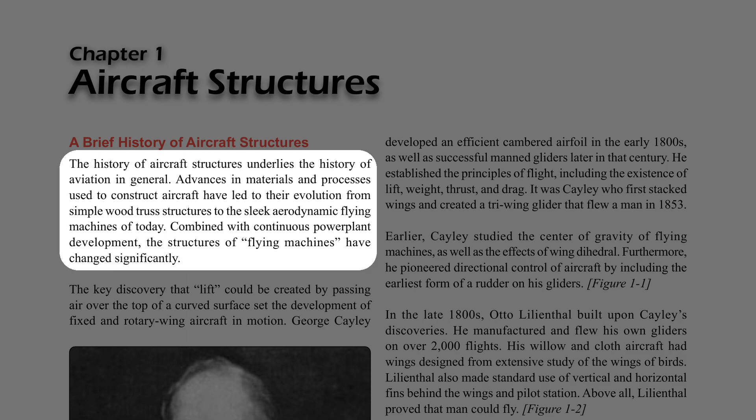The key discovery that lift could be created by passing air over the top of a curved surface set the development of fixed and rotary wing aircraft in motion.

George Cayley developed an efficient cambered airfoil in the early 1800s, as well as successful manned gliders later in that century. He established the principles of flight, including the existence of lift, weight, thrust, and drag. It was Cayley who first stacked wings and created a tri-wing glider that flew a man in 1853.

Earlier, Cayley studied the center of gravity of flying machines, as well as the effects of wing dihedral.

Furthermore, he pioneered directional control of aircraft by including the earliest form of a rudder on his gliders.

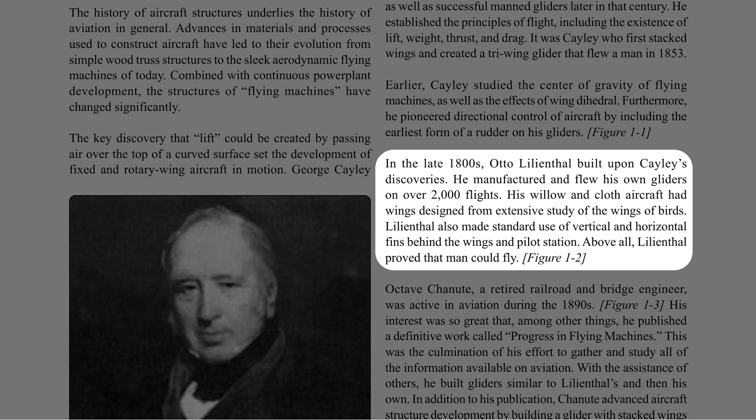In the late 1800s, Otto Lilienthal built upon Cayley's discoveries. He manufactured and flew his own gliders on over 2,000 flights. His willow and cloth aircraft had wings designed from extensive study of the wings of birds. Lilienthal also made standard use of vertical and horizontal fins behind the wings and pilot station. Above all, Lilienthal proved that man could fly.

Octave Chanute, a retired railroad and bridge engineer, was active in aviation during the 1890s. His interest was so great that, among other things, he published a definitive work called Progress in Flying Machines. This was the culmination of his effort to gather and study all of the information available on aviation.

With the assistance of others, he built gliders similar to Lilienthal's and then his own. In addition to his publication, Chanute advanced aircraft structure development by building a glider with stacked wings incorporating the use of wires as wing supports.

The work of all of these men was known to the Wright brothers when they built their successful powered airplane in 1903. The first of its kind to carry a man aloft, the Wright Flyer had thin cloth-covered wings attached to what was primarily truss structures made of wood. The wings contained forward and rear spars and were supported with both struts and wires. Stacked wings, two sets, were also part of the Wright Flyer.

Powered heavier-than-air aviation grew from the Wright design. Inventors and fledgling aviators began building their own aircraft. Early on, many were similar to that constructed by the Wrights, using wood and fabric with wires and struts to support the wing structure.

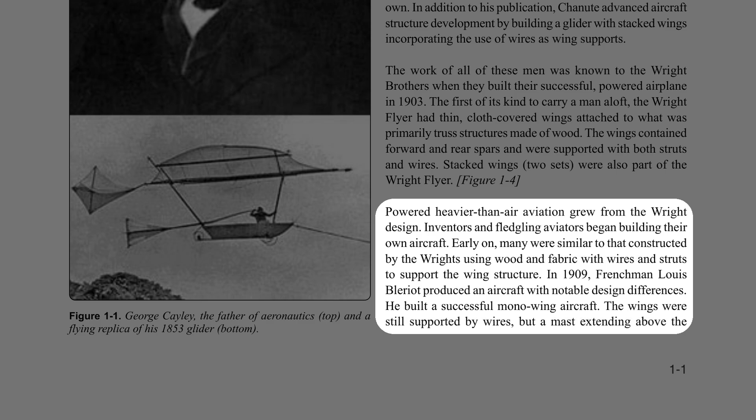In 1909, Frenchman Louis Blériot produced an aircraft with notable design differences. He built a successful monowing aircraft. The wings were still supported by wires, but a mast extending above the fuselage enabled the wings to be supported from above as well as underneath. This made possible the extended wing length needed to lift an aircraft with a single set of wings. Blériot used a Pratt truss-type fuselage frame.

More powerful engines were developed, and airframe structures changed to take advantage of the benefits. As early as 1910, German Hugo Junkers was able to build an aircraft with metal truss construction and metal skin due to the availability of stronger power plants to thrust the plane forward and into the sky. The use of metal instead of wood for the primary structure eliminated the need for external wing braces and wires. His J-1 also had a single set of wings, a monoplane instead of a stacked set.

Leading up to World War I, stronger engines also allowed designers to develop thicker wings with stronger spars. Wire wing bracing was no longer needed. Flatter, lower wing surfaces on high camber wings created more lift.

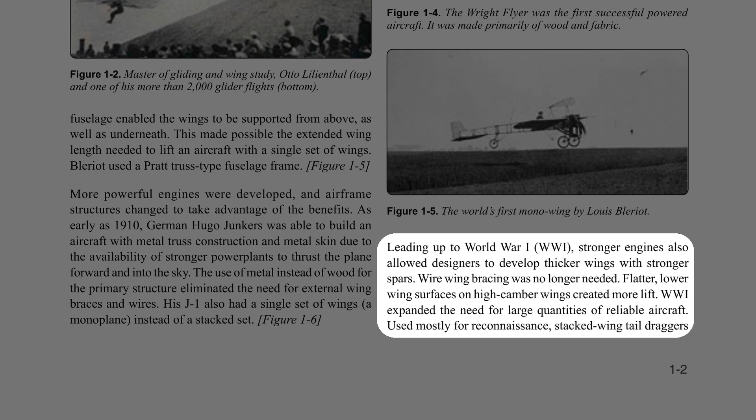WWI expanded the need for large quantities of reliable aircraft. Used mostly for reconnaissance, stacked wing-tail draggers with wood and metal truss frames with mostly fabric skin dominated the wartime sky. The Red Baron's Fokker DR-1 was typical.

In the 1920s, the use of metal in aircraft construction increased. Fuselages able to carry cargo and passengers were developed. The early flying boats with their hull-type construction from the shipbuilding industry provided the blueprints for semi-monocoque construction of fuselages. Truss-type designs faded. A tendency toward cleaner mono-wing designs prevailed.

Into the 1930s, all-metal aircraft accompanied new, lighter, and more powerful engines. Larger semi-monocoque fuselages were complemented with stress skin wing designs. Fewer truss and fabric aircraft were built.

World War II brought about a myriad of aircraft designs using all-metal technology. Deep fuel-carrying wings were the norm, but the desire for higher flight speeds prompted the development of thin-winged aircraft in which fuel was carried in the fuselage. The first composite structure aircraft, the de Havilland Mosquito, used a balsa wood sandwich material in the construction of the fuselage. The fiberglass radome was also developed during this period.

After WWII, the development of turbine engines led to higher altitude flight. The need for pressurized aircraft pervaded aviation. Semi-monocoque construction needed to be made even stronger as a result.

Refinements to the all-metal semi-monocoque fuselage structure were made to increase strength and combat metal fatigue caused by the pressurization-depressurization cycle. Rounded window and door openings were developed to avoid weak areas where cracks could form.

The use of honeycomb-constructed panels in Boeing's airline series saved weight while not compromising strength. Initially, aluminum core, with aluminum or fiberglass skin sandwich panels, were used on wing panels, flight control surfaces, cabin floorboards, and other applications. A steady increase in the use of honeycomb and foam core sandwich components, and a wide variety of composite materials, characterizes the state of aviation structures from the 1970s to the present.

Advanced techniques and material combinations have resulted in a gradual shift from aluminum to carbon fiber and other strong, lightweight materials. These new materials are engineered to meet specific performance requirements for various components on the aircraft. Many airframe structures are made of more than 50% advanced composites, with some airframes approaching 100%.

The term Very Light Jet, or VLJ, has come to describe a new generation of jet aircraft made almost entirely of advanced composite materials. It is possible that non-composite aluminum aircraft structures will become obsolete, as did the methods and materials of construction used by Cayley, Lilienthal, and the Wright brothers.

Generally, an aircraft is a device that is used for, or is intended to be used for, flight in the air. Major categories of aircraft are airplane, rotorcraft, glider, and lighter-than-air vehicles. Each of these may be divided further by major distinguishing features of the aircraft, such as airships and balloons. Both are lighter-than-air aircraft, but have differentiating features and are operated differently.

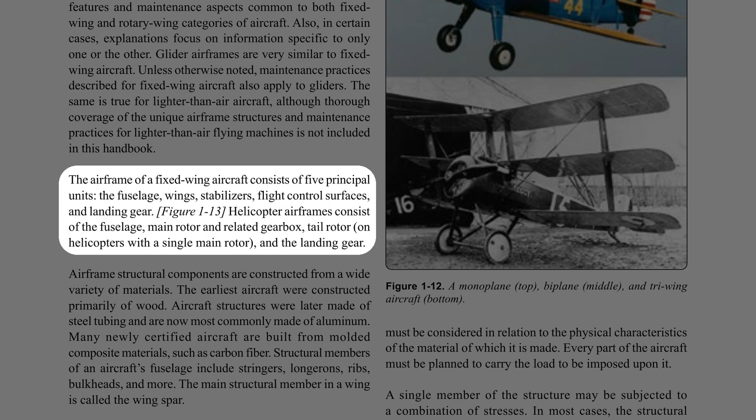Airframe structural components are constructed from a wide variety of materials. The earliest aircraft were constructed primarily of wood. Aircraft structures were later made of steel tubing and are now most commonly made of aluminum. Many newly certified aircraft are built from molded composite materials, such as carbon fiber.

Structural members of an aircraft's fuselage include stringers, longerons, ribs, bulkheads, and more. The main structural member in a wing is called the wing spar. The skin of aircraft can also be made from a variety of materials, ranging from impregnated fabric to plywood, aluminum, or composites. Under the skin and attached to the structural fuselage are the many components that support airframe function.

The entire airframe and its components are joined by rivets, bolts, screws, and other fasteners. Welding, adhesives, and special bonding techniques are also used.

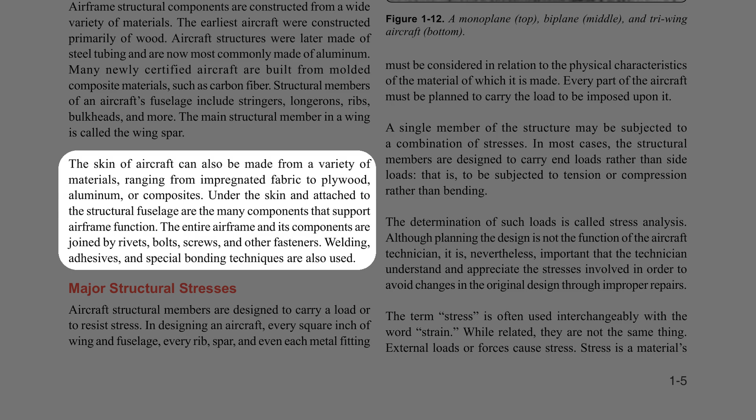Major structural stresses: aircraft structural members are designed to carry a load or to resist stress. In designing an aircraft, every square inch of wing and fuselage, every rib, spar, and even each metal fitting must be considered in relation to the physical characteristics of the material of which it is made. Every part of the aircraft must be planned to carry the load to be imposed upon it.

A single member of the structure may be subjected to a combination of stresses. In most cases, the structural members are designed to carry end loads rather than side loads, that is, to be subjected to tension or compression rather than bending. The determination of such loads is called stress analysis.

Although planning the design is not the function of the aircraft technician, it is nevertheless important that the technician understand and appreciate the stresses involved in order to avoid changes in the original design through improper repairs.

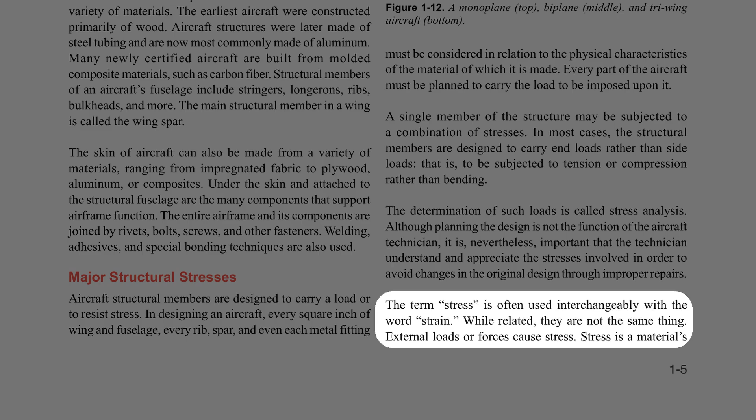The term stress is often used interchangeably with the word strain. While related, they are not the same thing. External loads or forces cause stress. Stress is a material's internal resistance, or counterforce, that opposes deformation. The degree of deformation of a material is strain.

When a material is subjected to a load or force, that material is deformed, regardless of how strong the material is or how light the load is. There are 5 major stresses to which all aircraft are subjected: tension, compression, torsion, shear, and bending.

Tension is the stress that resists the force that tends to pull something apart. The engine pulls the aircraft forward, but air resistance tries to hold it back. The result is tension, which stretches the aircraft. The tensile strength of a material is measured in pounds per square inch (psi), and is calculated by dividing the load in pounds required to pull the material apart by its cross-sectional area in square inches.

Compression is the stress that resists a crushing force. The compressive strength of a material is also measured in psi.

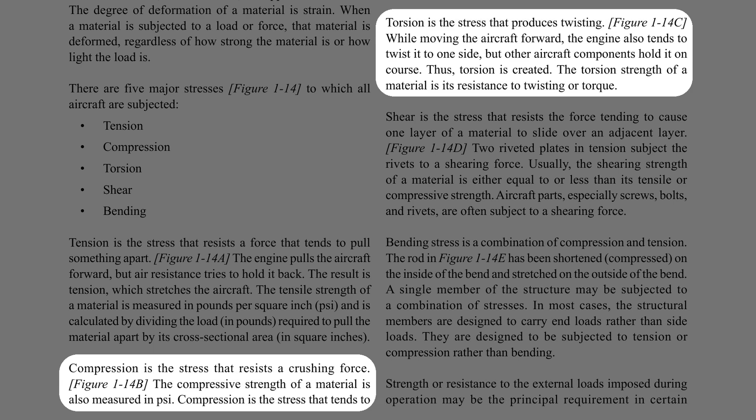Torsion is the stress that produces twisting. While moving the aircraft forward, the engine also tends to twist it to one side, but other aircraft components hold it on course. Thus, torsion is created. The torsion strength of a material is its resistance to twisting or torque.

Shear is the stress that resists the force tending to cause one layer of a material to slide over an adjacent layer. Two riveted plates in tension subject the rivets to a shearing force. Usually, the shearing strength of a material is either equal to or less than its tensile or compressive strength. Aircraft parts, especially screws, bolts, and rivets, are often subject to a shearing force.

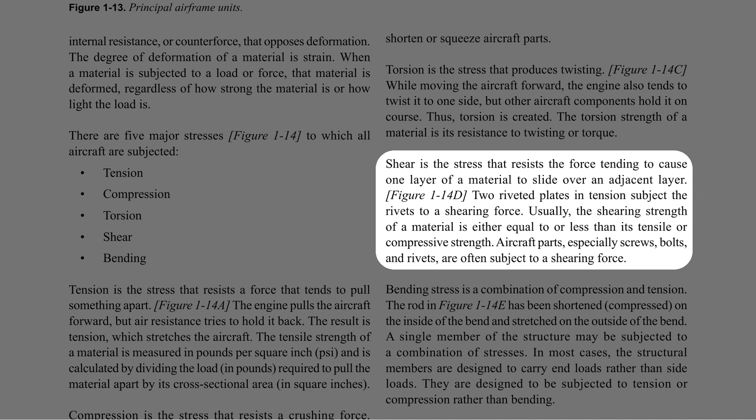Bending stress is a combination of compression and tension. The rod in Figure 1-14E has been shortened and compressed on the inside of the bend and stretched on the outside of the bend.

A single member of the structure may be subjected to a combination of stresses. In most cases, the structural members are designed to carry end loads rather than side loads. They are designed to be subjected to tension or compression rather than bending.

The strength or resistance to the external loads imposed during operation may be the principal requirement in certain structures. However, there are numerous other characteristics in addition to designing to control the 5 major stresses that engineers must consider. For example, cowling, fairings, and similar parts may not be subject to significant loads requiring a high degree of strength. However, these parts must have streamlined shapes to meet aerodynamic requirements such as reducing drag or directing airflow.

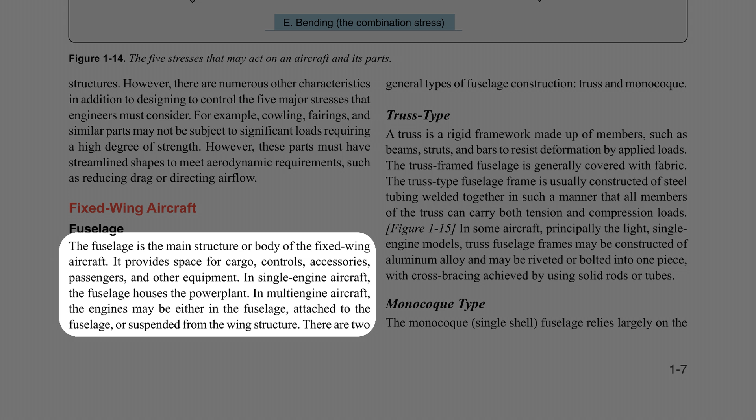Fixed-wing aircraft fuselage: the fuselage is the main structure or body of the fixed-wing aircraft. It provides space for cargo, controls, accessories, passengers, and other equipment. In single-engine aircraft, the fuselage houses the power plant. In multi-engine aircraft, the engines may be either in the fuselage, attached to the fuselage, or suspended from the wing structure. There are 2 general types of fuselage construction: truss and monocoque.

Truss type: a truss is a rigid framework made up of members, such as beams, struts, and bars, to resist deformation by applied loads. The truss frame fuselage is generally covered with fabric. The truss type fuselage frame is usually constructed of steel tubing welded together in such a manner that all members of the truss can carry both tension and compression loads.

In some aircraft, principally the light single-engine models, truss fuselage frames may be constructed of aluminum alloy and may be riveted or bolted into one piece, with cross bracing achieved by using solid rods or tubes. Monocoque type.

The monocoque single-shell fuselage relies largely on the strength of the skin or covering to carry the primary loads. The design may be divided into 3 classes: monocoque, semi-monocoque, and reinforced shell. Different portions of the same fuselage may belong to either of the 3 classes, but most modern aircraft are considered to be of semi-monocoque type construction.

The true monocoque construction uses formers, frame assemblies, and bulkheads to give shape to the fuselage. The heaviest of these structural members are located at intervals to carry concentrated loads and at points where fittings are used to attach other units such as wings, power plants, and stabilizers. Since no other bracing members are present, the skin must carry the primary stresses and keep the fuselage rigid. Thus, the biggest problem involved in monocoque construction is maintaining enough strength while keeping the weight within allowable limits.

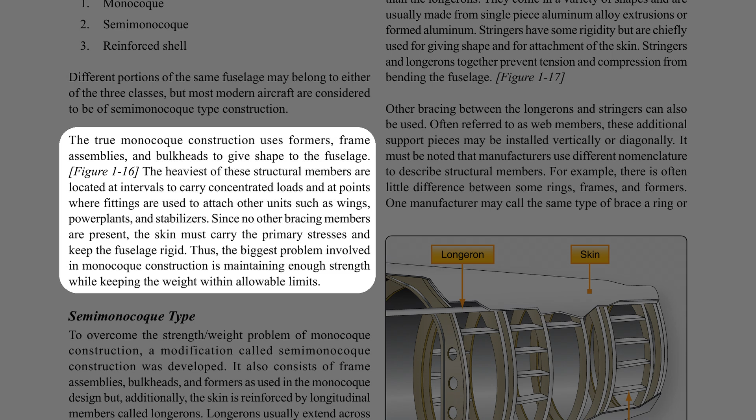Semi-monocoque type: to overcome the strength-weight problem of monocoque construction, a modification called semi-monocoque construction was developed. It also consists of frame assemblies, bulkheads, and formers as used in the monocoque design, but additionally, the skin is reinforced by longitudinal members called longerons. Longerons usually extend across several frame members and help the skin support primary bending loads. They are typically made of aluminum alloy, either of a single piece or a built-up construction.

The longerons are supplemented by other longitudinal members called stringers. Stringers are typically more numerous and lighter in weight than the longerons. They come in a variety of shapes and are usually made from single-piece aluminum alloy extrusions or formed aluminum. Stringers have some rigidity but are chiefly used for giving shape and for attachment of the skin. Stringers and longerons together prevent tension and compression from bending the fuselage.

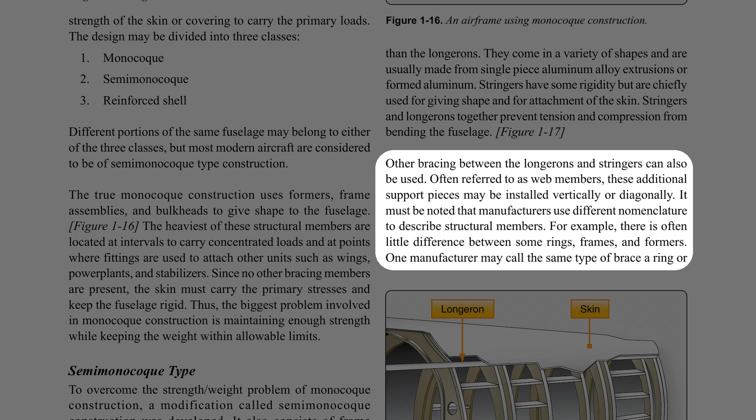Other bracing between the longerons and stringers can also be used. Often referred to as web members, these additional support pieces may be installed vertically or diagonally. It must be noted that manufacturers use different nomenclature to describe structural members. For example, there is often little difference between some rings, frames, and formers. One manufacturer may call the same type of brace a ring or a frame. Manufacturing instructions and specifications for a specific aircraft are the best guides.

The semi-monocoque fuselage is constructed primarily of alloys of aluminum and magnesium, although steel and titanium are sometimes found in areas of high temperatures. Individually, not one of the aforementioned components is strong enough to carry the loads imposed during flight and landing, but when combined, those components form a strong, rigid framework. This is accomplished with gussets, rivets, nuts and bolts, screws, and even friction stir welding. A gusset is a type of connection bracket that adds strength.

To summarize, in semi-monocoque fuselages, the strong, heavy longerons hold the bulkheads and formers, and these, in turn, hold the stringers, braces, web members, etc. All are designed to be attached together into the skin to achieve the full strength benefits of semi-monocoque design. It is important to recognize that the metal skin or covering carries part of the load. The fuselage skin thickness can vary with the load carried and the stresses sustained at a particular location.

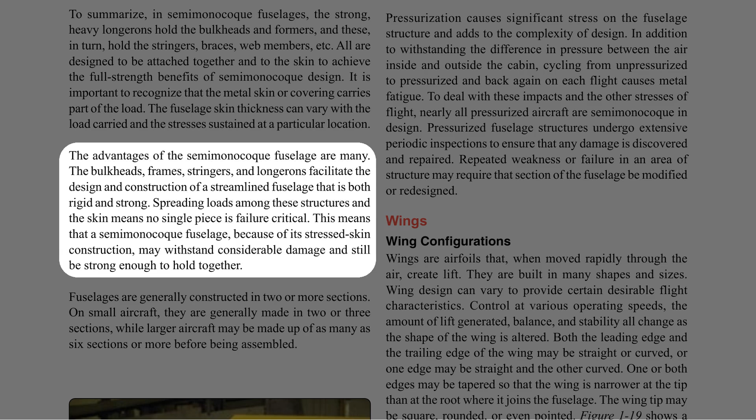The advantages of the semi-monocoque fuselage are many. The bulkheads, frames, stringers, and longerons facilitate the design and construction of a streamlined fuselage that is both rigid and strong. Spreading loads among these structures and the skin means no single piece is failure critical. This means that a semi-monocoque fuselage, because of its stressed skin construction, may withstand considerable damage and still be strong enough to hold together.

Fuselages are generally constructed in 2 or more sections. On small aircraft, they are generally made in 2 or 3 sections, while larger aircraft may be made up of as many as 6 sections or more before being assembled. Reinforced shell type: the reinforced shell has the skin reinforced by a complete framework of structural members.

Pressurization: many aircraft are pressurized. This means that air is pumped into the cabin after takeoff, and a difference in pressure between the air inside the cabin and the air outside the cabin is established. This differential is regulated and maintained. In this manner, enough oxygen is made available for passengers to breathe normally and move around the cabin without special equipment at high altitudes. Pressurization causes significant stress on the fuselage structure and adds to the complexity of design.

In addition to withstanding the difference in pressure between the air inside and outside the cabin, cycling from unpressurized to pressurized and back again on each flight causes metal fatigue. To deal with these impacts and the other stresses of flight, nearly all pressurized aircraft are semi-monocoque in design. Pressurized fuselage structures undergo extensive periodic inspections to ensure that any damage is discovered and repaired. Repeated weakness or failure in an area of structure may require that section of the fuselage be modified or redesigned.

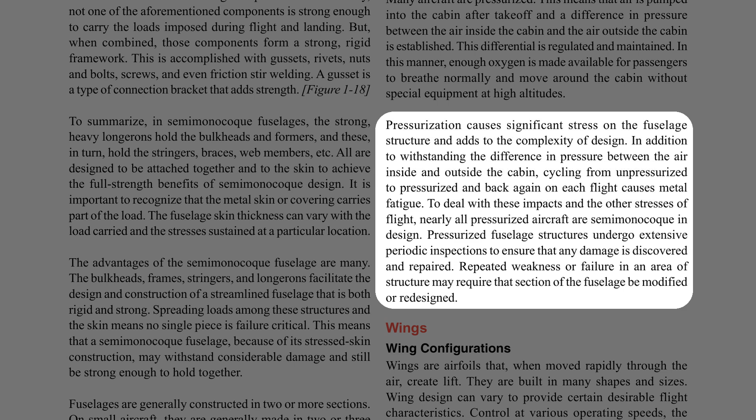Wings, wing configurations.

Wings are airfoils that, when moved rapidly through the air, create lift. They are built in many shapes and sizes. Wing design can vary to provide certain desirable flight characteristics. Control at various operating speeds, the amount of lift generated, balance, and stability all change as the shape of the wing is altered. Both the leading edge and the trailing edge of the wing may be straight or curved, or one edge may be straight and the other curved.

One or both edges may be tapered so that the wing is narrower at the tip than at the root where it joins the fuselage. The wing tip may be square, rounded, or even pointed. Figure 1-19 shows a number of typical wing leading and trailing edge shapes.

The wings of an aircraft can be attached to the fuselage at the top, mid-fuselage, or at the bottom. They may extend perpendicular to the horizontal plane of the fuselage, or can angle up or down slightly. This angle is known as the wing dihedral. The dihedral angle affects the lateral stability of the aircraft. Figure 1-20 shows some common wing attach points and dihedral angle.

Wing structure. The wings of an aircraft are designed to lift it into the air. Their particular design for any given aircraft depends on a number of factors, such as size, weight, use of the aircraft, desired speed in flight and at landing, and desired rate of climb. The wings of aircraft are designated left and right, corresponding to the left and right sides of the operator when seated in the flight deck.

Often wings are of full cantilever design. This means they are built so that no external bracing is needed. They are supported internally by structural members assisted by the skin of the aircraft. Other aircraft wings use external struts or wires to assist in supporting the wing and carrying the aerodynamic and landing loads. Wing support cables and struts are generally made from steel.

Many struts and their attached fittings have fairings to reduce drag. Short, nearly vertical supports called jury struts are found on struts that attach to the wings a great distance from the fuselage. This serves to subdue strut movement and oscillation caused by the air flowing around the strut in flight. Figure 1-22 shows samples of wings using external bracing, also known as semi-cantilever wings. Cantilever wings built with no external bracing are also shown.

Aluminum is the most common material from which to construct wings, but they can be wood covered with fabric and occasionally a magnesium alloy has been used. Moreover, modern aircraft are tending toward lighter and stronger materials throughout the airframe and in wing construction. Wings made entirely of carbon fiber or other composite materials exist, as well as wings made of a combination of materials for maximum strength to weight performance.

The internal structures of most wings are made up of spars and stringers running spanwise, and ribs and formers or bulkheads running chordwise, leading edge to trailing edge. The spars are the principal structural members of a wing. They support all distributed loads as well as concentrated weights such as the fuselage, landing gear, and engines. The skin, which is attached to the wing structure, carries part of the loads imposed during flight. It also transfers the stresses to the wing ribs. The ribs, in turn, transfer the loads to the wing spars.

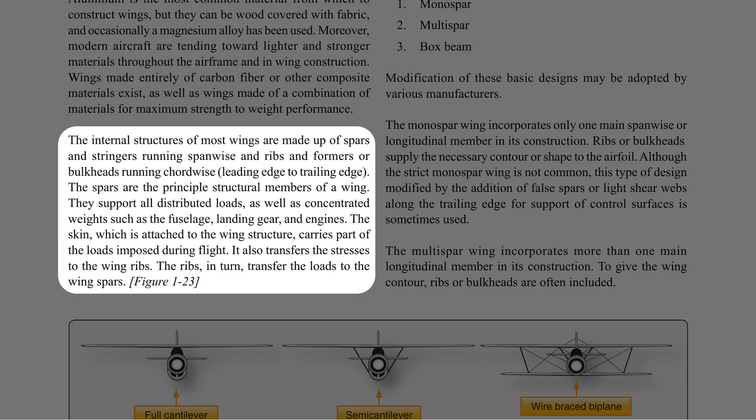In general, wing construction is based on one of three fundamental designs: monospar, multispar, and box beam. Modification of these basic designs may be adopted by various manufacturers. The monospar wing incorporates only one main spanwise or longitudinal member in its construction. Ribs or bulkheads supply the necessary contour or shape to the airfoil. Although the strict monospar wing is not common, this type of design modified by the addition of false spars or light shear webs along the trailing edge for support of control surfaces is sometimes used. The multispar wing incorporates more than one main longitudinal member in its construction.

To give the wing contour, ribs or bulkheads are often included. The box beam type of wing construction uses two main longitudinal members with connecting bulkheads to furnish additional strength and to give contour to the wing. A corrugated sheet may be placed between the bulkheads and the smooth outer skin so that the wing can better carry tension and compression loads.

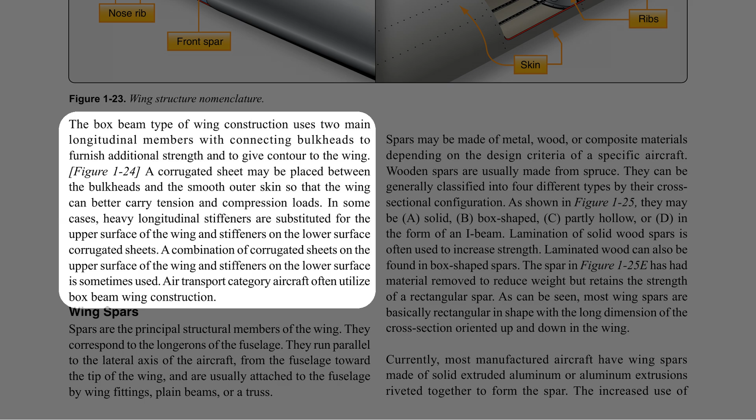Wing spars are the principal structural members of the wing. They correspond to the longerons of the fuselage, running parallel to the lateral axis from the fuselage toward the wingtip, usually attached to the fuselage by wing fittings, plain beams, or a truss. Spars may be made of metal, wood, or composite materials depending on the design criteria of a specific aircraft.

Wooden spars are usually made from spruce. They can be generally classified into four different types by cross-sectional configuration: solid, box-shaped, partly hollow, or in the form of an I-beam. Lamination of solid wood spars is often used to increase strength, and laminated wood can also be found in box-shaped spars. One spar type has had material removed to reduce weight but retains the strength of a rectangular spar.

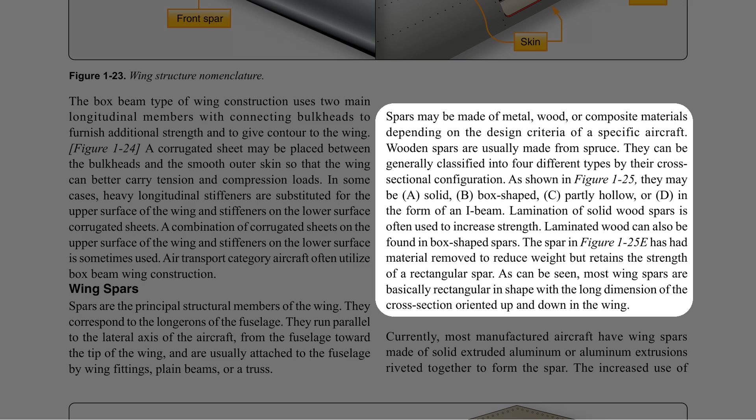As can be seen, most wing spars are basically rectangular in shape with the long dimension of the cross-section oriented up and down in the wing. Currently, most manufactured aircraft have wing spars made of solid extruded aluminum or aluminum extrusions riveted together to form the spar.

The increased use of composites and the combining of materials should make airmen vigilant for wing spars made from a variety of materials. Most manufactured aircraft have wing spars made of solid extruded aluminum or aluminum extrusions riveted together to form the spar.

Figure 1-26 shows examples of metal wing spar cross-sections. In an I-beam spar, the top and bottom are called the caps, and the vertical section is called the web. The entire spar can be extruded from one piece of metal, but often it's built up from multiple extrusions or formed angles. The web forms the principal depth portion of the spar, and the cap strips, extrusions, formed angles, or milled sections are attached to it. Together, these members carry the loads caused by wing bending, with the caps providing a foundation for attaching the skin.

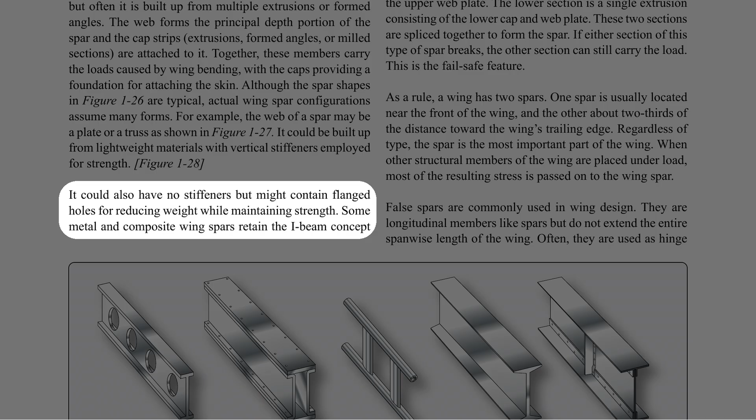Although the spar shapes shown are typical, actual wing spar configurations assume many forms. For example, the web of a spar may be a plate or a truss. It could be built up from lightweight materials with vertical stiffeners employed for strength, or it could have no stiffeners but contain flanged holes for reducing weight while maintaining strength. Some metal and composite wing spars retain the I-beam concept but use a sine wave web.

Additionally, fail-safe spar web design exists. Fail-safe means that should one member of a complex structure fail, some other part of the structure assumes the load of the failed member and permits continued operation. A spar with fail-safe construction is made in two sections. The top section consists of a cap riveted to the upper web plate.

The lower section is a single extrusion consisting of the lower cap and web plate. These two sections are spliced together to form the spar. If either section of this type of spar breaks, the other section can still carry the load. This is the fail-safe feature.

As a rule, a wing has two spars. One spar is usually located near the front of the wing, and the other about two-thirds of the distance toward the wing's trailing edge. Regardless of type, the spar is the most important part of the wing. When other structural members of the wing are placed under load, most of the resulting stress is passed on to the wing spar.

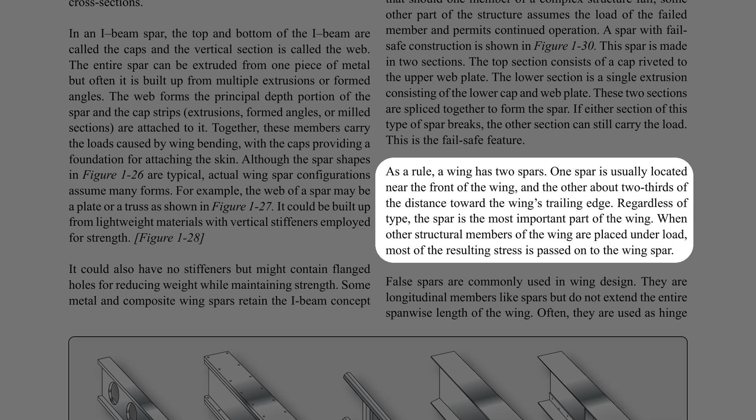False spars are commonly used in wing design. They are longitudinal members like spars, but do not extend the entire span-wise length of the wing. Often they are used as hinge attach points for control surfaces, such as an aileron spar.

Wing ribs are the structural crosspieces that combine with spars and stringers to make up the framework of the wing. They usually extend from the wing leading edge to the rear spar or to the trailing edge of the wing. The ribs give the wing its cambered shape and transmit the load from the skin and stringers to the spars. Similar ribs are also used in ailerons. Wing ribs are usually manufactured from either wood or metal.

Aircraft with wood wing spars may have wood or metal ribs, while most aircraft with metal spars have metal ribs. Wood ribs are usually manufactured from spruce.

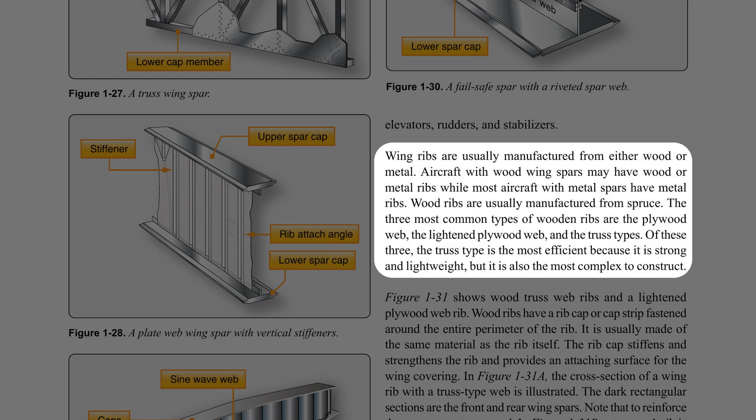The three most common types of wooden ribs are the plywood web, the lightened plywood web, and the truss types. Of these three, the truss type is the most efficient because it is strong and lightweight, but it is also the most complex to construct. Figure 131 shows wood truss web ribs and a lightened plywood web rib.

Wood ribs have a rib cap, or cap strip, fastened around the entire perimeter of the rib. It is usually made of the same material as the rib itself. The rib cap stiffens and strengthens the rib and provides an attaching surface for the wing covering.

In Figure 131A, the cross-section of a wing rib with a truss-type web is illustrated. The dark rectangular sections are the front and rear wing spars. Note that, to reinforce the truss, gussets are used.

In Figure 1-31B, a truss web rib is shown with a continuous gusset. It provides greater support throughout the entire rib with very little additional weight. A continuous gusset stiffens the cap strip in the plane of the rib.

This aids in preventing buckling and helps to obtain better rib-skin joints where nail gluing is used. Such a rib can resist the driving force of nails better than the other types. Continuous gussets are also more easily handled than the many small separate gussets otherwise required.

Figure 131C shows a rib with a lightened plywood web. It also contains gussets to support the web cap strip interface. The cap strip is usually laminated to the web, especially at the leading edge.

A wing rib may also be referred to as a plain rib or a main rib. Wing ribs with specialized locations or functions are given names that reflect their uniqueness. For example, ribs that are located entirely forward of the front spar that are used to shape and strengthen the wing leading edge are called nose ribs or false ribs.

False ribs are ribs that do not span the entire wing chord, which is the distance from the leading edge to the trailing edge of the wing.

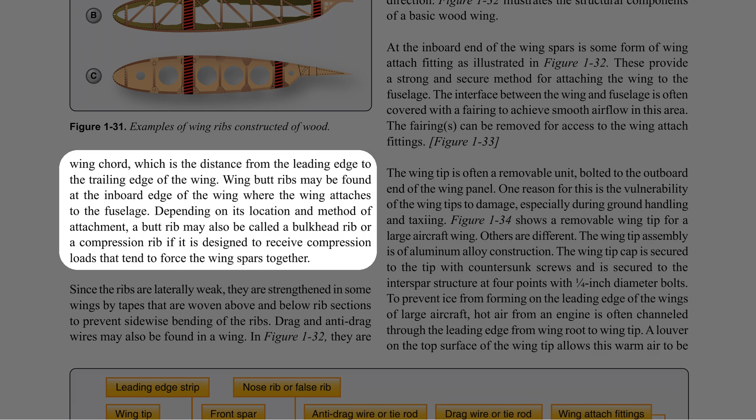Since the ribs are laterally weak, they are strengthened in some wings by tapes that are woven above and below rib sections to prevent sidewise bending of the ribs.

Drag and anti-drag wires may also be found in a wing. In Figure 132, they are shown crisscross between the spars to form a truss to resist forces acting on the wing in the direction of the wing chord.

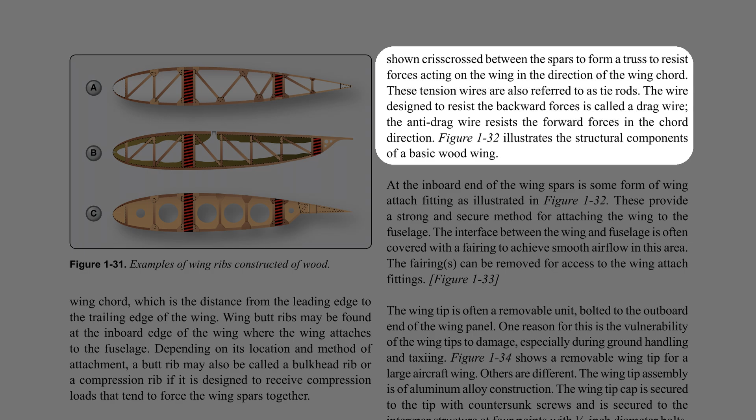These tension wires are also referred to as tie rods. The wire designed to resist the backward forces is called a drag wire. The anti-drag wire resists the forward forces in the chord direction. Figure 132 illustrates the structural components of a basic wood wing.

At the inboard end of the wing spars is some form of wing attach fitting as illustrated in Figure 132. These provide a strong and secure method for attaching the wing to the fuselage. The interface between the wing and fuselage is often covered with a fairing to achieve smooth airflow in this area. The fairing can be removed for access to the wing attach fittings.

The wing tip is often a removable unit bolted to the outboard end of the wing panel. One reason for this is the vulnerability of the wing tips to damage, especially during ground handling and taxiing. Figure 134 shows a removable wing tip for a large aircraft wing.

The wingtip assembly is of aluminum alloy construction. The wingtip cap is secured to the tip with countersunk screws and is secured to the interspar structure at 4 points with ¼-inch diameter bolts.

To prevent ice from forming on the leading edge of the wings of large aircraft, hot air from an engine is often channeled through the leading edge from wing root to wingtip. A louver on the top surface of the wingtip allows this warm air to be exhausted overboard.

Wing position lights are located at the center of the tip and are not directly visible from the flight deck. As an indication that the wingtip light is operating, some wingtips are equipped with a lucite rod to transmit the light to the leading edge.

Wing skin. Often, the skin on a wing is designed to carry part of the flight and ground loads in combination with the spars and ribs.

This is known as a stressed skin design. The all-metal full cantilever wing section illustrated in Figure 1-35 shows the structure of one such design. The lack of extra internal or external bracing requires that the skin share some of the load. Notice the skin is stiffened to aid with this function.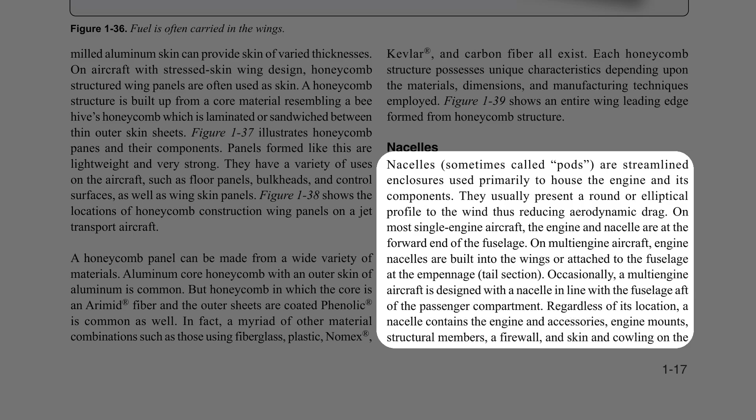Occasionally, a multi-engine aircraft is designed with a nacelle in line with the fuselage aft of the passenger compartment. Regardless of its location, a nacelle contains the engine and accessories, engine mounts, structural members, a firewall, and skin and cowling. Some aircraft have nacelles that are designed to house the landing gear when retracted.

Retracting the gear to reduce wind resistance is standard procedure on high-performance, high-speed aircraft. The wheel well is the area where the landing gear is attached and stowed when retracted. Wheel wells can be located in the wings and/or fuselage when not part of the nacelle. Figure 140 shows an engine nacelle incorporating the landing gear with the wheel well extending into the wing root.

The framework of a nacelle usually consists of structural members similar to those of the fuselage. Lengthwise members, such as longerons and stringers, combined with horizontal vertical members, such as rings, formers, and bulkheads, to give the nacelle its shape and structural integrity.

A firewall is incorporated to isolate the engine compartment from the rest of the aircraft. This is basically a stainless steel or titanium bulkhead that contains the fire in the confines of the nacelle, rather than letting it spread throughout the airframe.

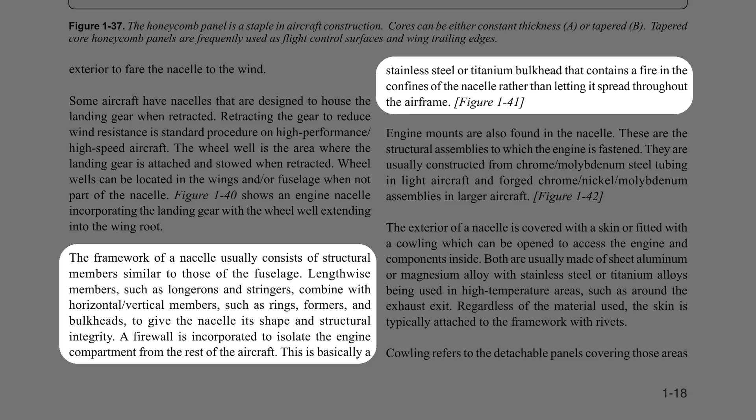Engine mounts are also found in the nacelle. These are the structural assemblies to which the engine is fastened. They are usually constructed from chrome-molybdenum steel tubing in light aircraft and forged chrome-nickel-molybdenum assemblies in larger aircraft.

The exterior of a nacelle is covered with a skin or fitted with a cowling which can be opened to access the engine and components inside. Both are usually made of sheet aluminum or magnesium alloy, with stainless steel or titanium alloys being used in high-temperature areas such as around the exhaust exit. Regardless of the material used, the skin is typically attached to the framework with rivets.

Cowling refers to the detachable panels covering those areas into which access must be gained regularly, such as the engine and its accessories. It is designed to provide a smooth airflow over the nacelle and to protect the engine from damage. Cowl panels are generally made of aluminum alloy construction.

However, stainless steel is often used as the inner skin aft of the power section, for cowl flaps, and near cowl flap openings. It is also used for oil cooler ducts. Cowl flaps are movable parts of the nacelle cowling that open and close to regulate engine temperature.

There are many engine cowl designs. Figure 143 shows an exploded view of the pieces of cowling for a horizontally opposed engine on a light aircraft. It is attached to the nacelle by means of screws and or quick-release fasteners.

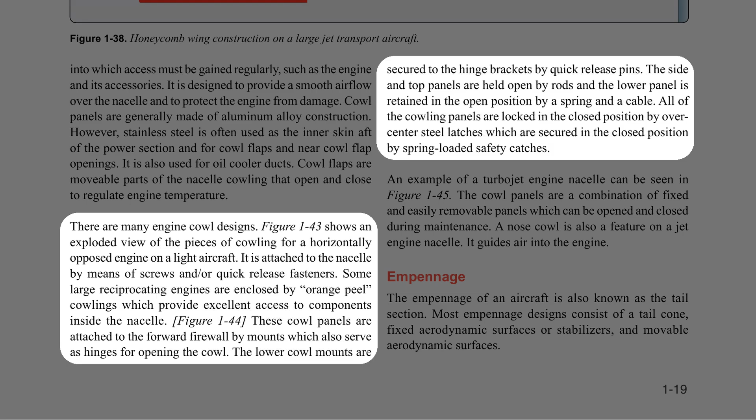Some large reciprocating engines are enclosed by orange peel cowlings, which provide excellent access to components inside the nacelle. These cowl panels are attached to the forward firewall by mounts, which also serve as hinges for opening the cowl. The lower cowl mounts are secured to the hinge brackets by quick-release pins.

The side and top panels are held open by rods, and the lower panel is retained in the open position by a spring and a cable. All of the cowling panels are locked in the closed position by over-center steel latches, which are secured in the closed position by spring-loaded safety catches.

An example of the turbojet engine nacelle can be seen in Figure 1-45. The cowl panels are a combination of fixed and easily removable panels, which can be opened and closed during maintenance. A nose cowl is also a feature on a jet engine nacelle. It guides air into the engine.

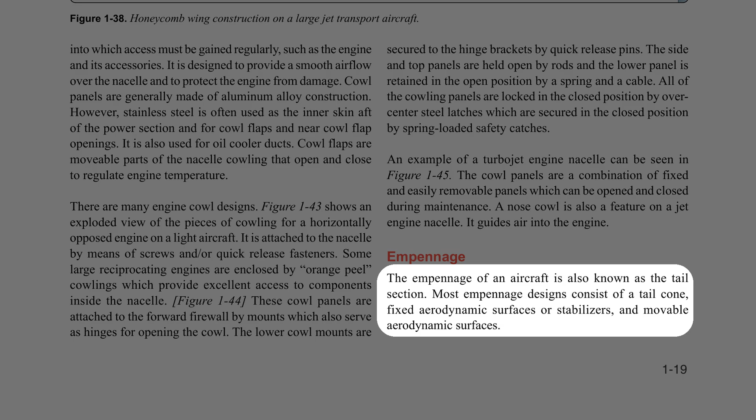The empennage of an aircraft is also known as the tail section. Most empennage designs consist of a tail cone, fixed aerodynamic surfaces or stabilizers, and movable aerodynamic surfaces. The tail cone serves to close and streamline the aft end of most fuselages.

The cone is made up of structural members like those of the fuselages; however, cones are usually of lighter construction since they receive less stress than the fuselages. The other components of the typical empennage are of heavier construction than the tail cone.

These members include fixed surfaces that help stabilize the aircraft and movable surfaces that help direct an aircraft during flight. The fixed surfaces are the horizontal stabilizer and vertical stabilizer. The movable surfaces are usually a rudder located at the aft edge of the vertical stabilizer and an elevator located at the aft edge of the horizontal stabilizer.

The structure of the stabilizers is very similar to that used in wing construction. Figure 148 shows a typical vertical stabilizer. Notice the use of spars, ribs, stringers, and skin like those found in a wing. They perform the same function: shaping and supporting the stabilizer and transferring stresses.

Bending, torsion, and shear created by air loads in flight pass from one structural member to another. Each member absorbs some of the stress and passes the remainder on to the others. Ultimately, the spar transmits any overloads to the fuselage. A horizontal stabilizer is built the same way.

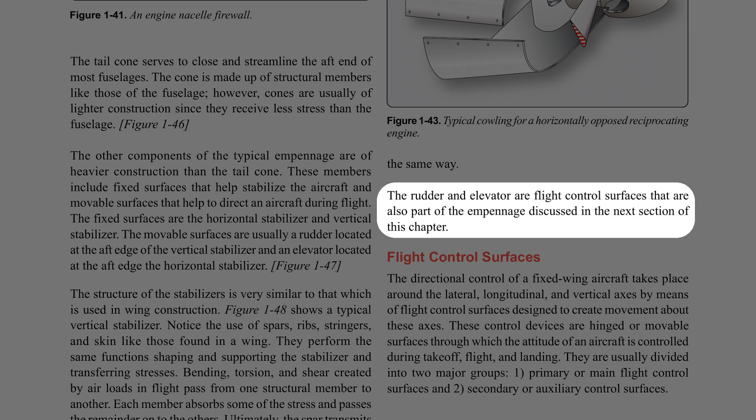The rudder and elevator are flight control surfaces that are also part of the empennage, discussed in the next section of this chapter: flight control surfaces.

The directional control of a fixed-wing aircraft takes place around the lateral, longitudinal, and vertical axes by means of flight control surfaces designed to create movement about these axes. These control devices are hinged or movable surfaces through which the attitude of an aircraft is controlled during takeoff, flight, and landing. They are usually divided into two major groups: primary or main flight control surfaces, and secondary or auxiliary control surfaces.

Primary flight control surfaces. The primary flight control surfaces on a fixed-wing aircraft include ailerons, elevators, and the rudder. The ailerons are attached to the trailing edge of both wings and, when moved, rotate the aircraft around the longitudinal axis. The elevator is attached to the trailing edge of the horizontal stabilizer.

When the elevator is moved, it alters aircraft pitch, which is the attitude about the horizontal or lateral axis. The rudder is hinged to the trailing edge of the vertical stabilizer. When the rudder changes position, the aircraft rotates about the vertical axis, yaw. Figure 149 shows the primary flight controls of a light aircraft and the movement they create relative to the three axes of flight.

Primary control surfaces are usually similar in construction to one another and vary only in size, shape, and methods of attachment. On aluminum light aircraft, their structure is often similar to an all-metal wing. This is appropriate because the primary control surfaces are simply smaller aerodynamic devices.

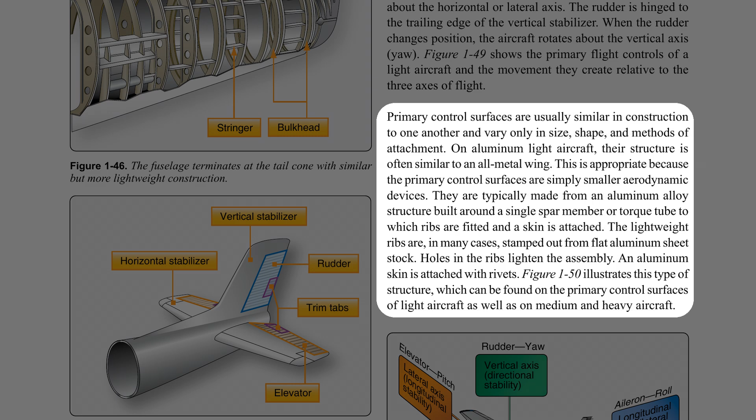Primary control surfaces constructed from composite materials are also commonly used. These are found on many heavy and high-performance aircraft, as well as gliders, home-built, and light sport aircraft. The weight and strength advantages over traditional construction can be significant. A wide variety of materials and construction techniques are employed. Figure 1-51 shows examples of aircraft that use composite technology on primary flight control surfaces.

Note that the control surfaces of fabric-covered aircraft often have fabric-covered surfaces, just as aluminum-skinned light aircraft typically have all aluminum control surfaces. There's a critical need for primary control surfaces to be balanced, so they do not vibrate or flutter in the wind. Performed to manufacturer's instructions, balancing usually consists of assuring that the center of gravity of a particular device is at or forward of the hinge point. Failure to properly balance a control surface could lead to catastrophic failure.

Figure 1-52 illustrates several aileron configurations with their hinge points well aft of the leading edge. This is a common design feature used to prevent flutter.

Ailerons are the primary flight control surfaces that move the aircraft about the longitudinal axis. In other words, movement of the ailerons in flight causes the aircraft to roll. Ailerons are usually located on the outboard trailing edge of each of the wings. They are built into the wing and are calculated as part of the wing's surface area. Figure 1-53 shows aileron locations on various wingtip designs.

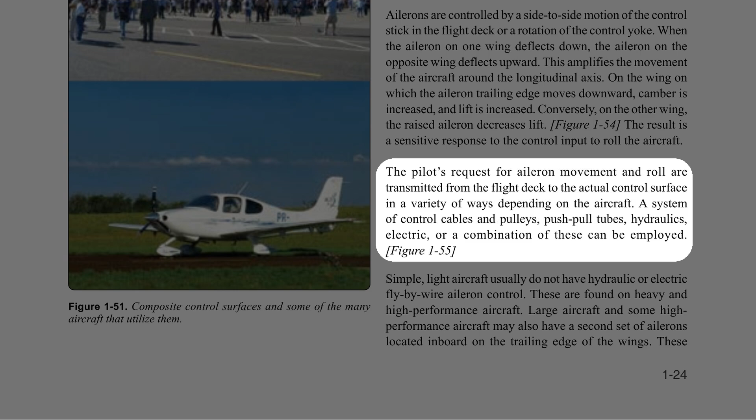The pilot's requests for aileron movement and roll are transmitted from the flight deck to the actual control surface in a variety of ways depending on the aircraft. A system of control cables and pulleys, push-pull tubes, hydraulics, electric, or a combination of these can be employed. Simple, light aircraft usually do not have hydraulic or electric fly-by-wire aileron control. These are found on heavy and high-performance aircraft.

Large aircraft and some high-performance aircraft may also have a second set of ailerons located inboard on the trailing edge of the wings. These are part of a complex system of primary and secondary control surfaces used to provide lateral control and stability in flight. At low speeds, the ailerons may be augmented by the use of flaps and spoilers. At high speeds, only inboard aileron deflection is required to roll the aircraft while the other control surfaces are locked out or remain stationary. Figure 1-56 illustrates the location of the typical flight control surfaces found on a transport category aircraft.

Elevator. The elevator is the primary flight control surface that moves the aircraft around the horizontal or lateral axis. This causes the nose of the aircraft to pitch up or down. The elevator is hinged to the trailing edge of the horizontal stabilizer and typically spans most or all of its width. It is controlled in the flight deck by pushing or pulling the control stick or yoke forward or aft.

Light aircraft use a system of control cables and pulleys or push-pull tubes to transfer flight deck inputs to the movement of the elevator. High-performance and large aircraft typically employ more complex systems. Hydraulic power is commonly used to move the elevator on these aircraft. On aircraft equipped with fly-by-wire controls, a combination of electrical and hydraulic power is used.

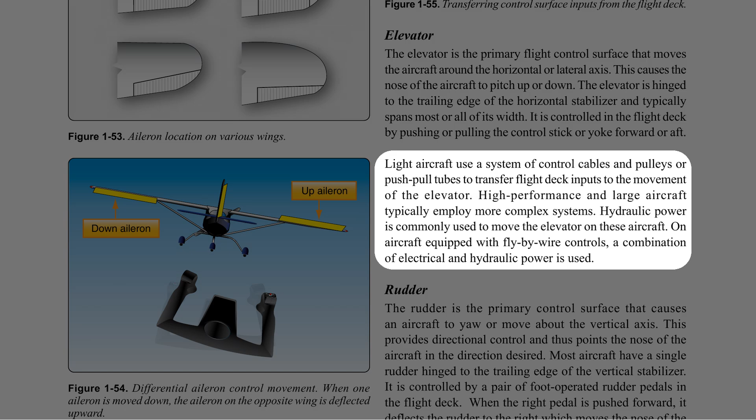Rudder. The rudder is the primary control surface that causes an aircraft to yaw or move about the vertical axis. This provides directional control and thus points the nose of the aircraft in the direction desired. Most aircraft have a single rudder hinged to the trailing edge of the vertical stabilizer. It is controlled by a pair of foot-operated rudder pedals in the flight deck.

When the right pedal is pushed forward, it deflects the rudder to the right, which moves the nose of the aircraft to the right. The left pedal is rigged to simultaneously move aft. When the left pedal is pushed forward, the nose of the aircraft moves to the left. As with the other primary flight controls, the transfer of the movement of the flight deck controls to the rudder varies with the complexity of the aircraft. Many aircraft incorporate the directional movement of the nose, or tail wheel, into the rudder control system for ground operation.

This allows the operator to steer the aircraft with the rudder pedals during taxi when the airspeed is not high enough for the control surfaces to be effective.

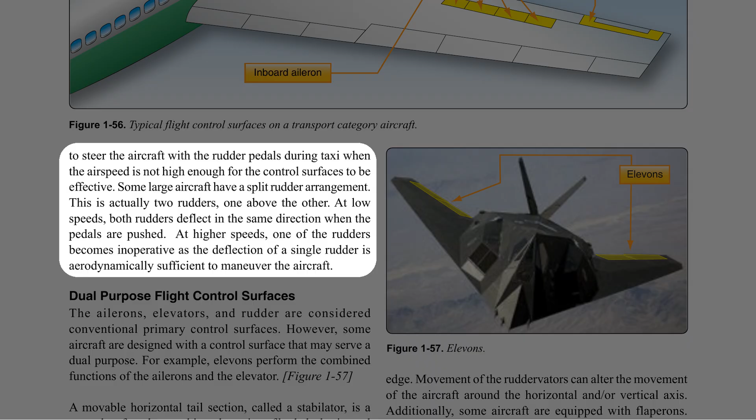Some large aircraft have a split rudder arrangement. This is actually two rudders, one above the other. At low speeds, both rudders deflect in the same direction when the pedals are pushed. At higher speeds, one of the rudders becomes inoperative, as the deflection of a single rudder is aerodynamically sufficient to maneuver the aircraft.

Dual-purpose flight control surfaces, the ailerons, elevators, and rudder, are considered conventional primary control surfaces. However, some aircraft are designed with a control surface that may serve a dual purpose.

For example, elevons perform the combined functions of the ailerons and the elevator. A movable horizontal tail section, called a stabilator, is a control surface that combines the action of both the horizontal stabilizer and the elevator. Basically, a stabilator is a horizontal stabilizer that can also be rotated about the horizontal axis to affect the pitch of the aircraft.

A ruddervator combines the action of the rudder and elevator. This is possible on aircraft with V-tail empennages, where the traditional horizontal and vertical stabilizers do not exist. Instead, two stabilizers angle upward and outward from the aft fuselage in a V configuration. Each contains a movable ruddervator built into the trailing edge. Movement of the ruddervators can alter the movement of the aircraft around the horizontal and/or vertical axis.

Additionally, some aircraft are equipped with flaperons. Flaperons are ailerons which can also act as flaps. Flaps are secondary control surfaces on most wings, discussed in the next section of this chapter.

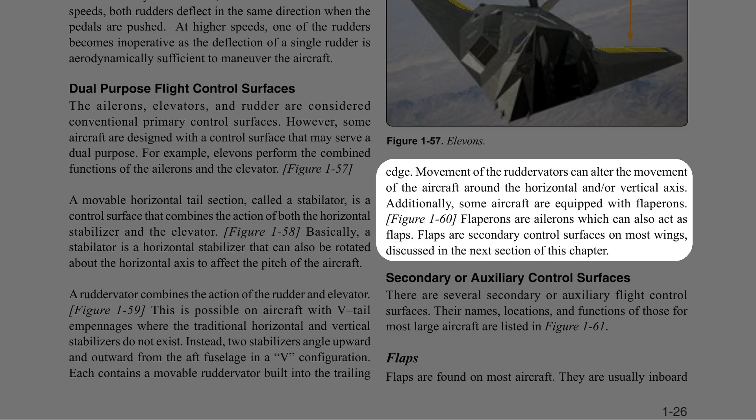Secondary or auxiliary control surfaces. There are several secondary or auxiliary flight control surfaces. Their names, locations, and functions for most large aircraft are listed in Figure 1-61.

Flaps. Flaps are found on most aircraft. They are usually inboard on the wing's trailing edges adjacent to the fuselage. Leading edge flaps are also common. They extend forward and down from the inboard wing leading edge.

The flaps are lowered to increase the camber of the wings and provide greater lift and control at slow speeds. They enable landing at slower speeds and shorten the amount of runway required for takeoff and landing. The amount that the flaps extend and the angle they form with the wing can be selected from the flight deck. Typically, flaps can extend up to 45-50 degrees.

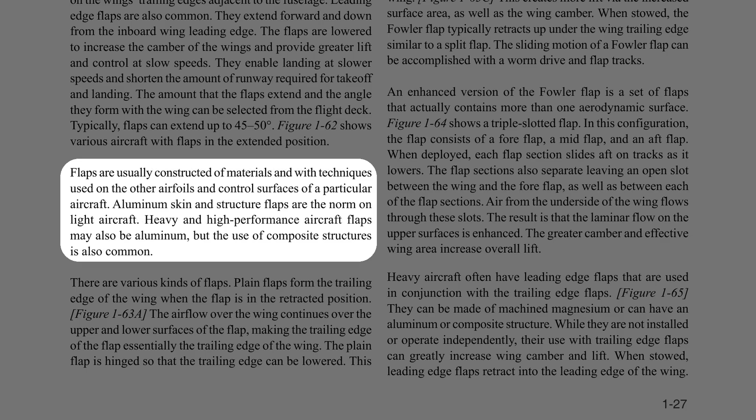Figure 1-62 shows various aircraft with flaps in the extended position. Flaps are usually constructed of materials and with techniques used on the other airfoils and control surfaces of a particular aircraft. Aluminum skin and structure flaps are the norm on light aircraft. Heavy and high-performance aircraft flaps may also be aluminum, but the use of composite structures is also common.

There are various kinds of flaps. Plain flaps form the trailing edge of the wing when the flap is in the retracted position. The airflow over the wing continues over the upper and lower surfaces of the flap, making the trailing edge of the flap essentially the trailing edge of the wing. The plain flap is hinged so that the trailing edge can be lowered. This increases wing camber and provides greater lift.

A split flap is normally housed under the trailing edge of the wing. It is usually just a braced flat metal plate hinged at several places along its leading edge. The upper surface of the wing extends to the trailing edge of the flap. When deployed, the split flap trailing edge lowers away from the trailing edge of the wing. Airflow over the top of the wing remains the same. Airflow under the wing now follows the camber created by the lowered split flap, increasing lift.

Fowler flaps not only lower the trailing edge of the wing when deployed, but also slide aft, effectively increasing the area of the wing. This creates more lift via the increased surface area, as well as the wing camber. When stowed, the Fowler flap typically retracts up under the wing trailing edge, similar to a split flap. The sliding motion of a Fowler flap can be accomplished with a worm drive and flap tracks.

An enhanced version of the Fowler flap is a set of flaps that actually contains more than one aerodynamic surface. Figure 1-64 shows a triple slotted flap. In this configuration, the flap consists of a foreflap, a mid-flap, and an aft flap. When deployed, each flap section slides aft on tracks as it lowers. The flap sections also separate, leaving an open slot between the wing and the foreflap, as well as between each of the flap sections. Air from the underside of the wing flows through these slots.

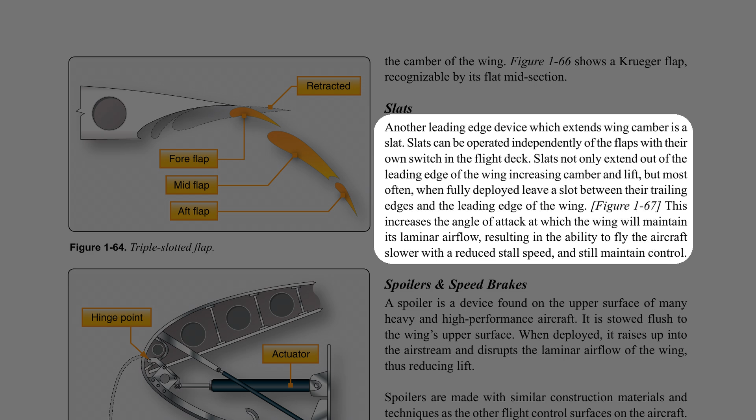Spoilers and speed brakes. A spoiler is a device found on the upper surface of many heavy and high-performance aircraft. It is stowed flush to the wing's upper surface. When deployed, it raises up into the airstream and disrupts the laminar airflow of the wing, thus reducing lift.

Spoilers are made with similar construction materials and techniques as the other flight control surfaces on the aircraft. Often they are honeycomb core flat panels. At low speeds, spoilers are rigged to operate when the ailerons operate, to assist with the lateral movement and stability

of the aircraft. On the wing where the aileron is moved up, the spoilers also raise, thus amplifying the reduction of lift on that wing. On the wing with downward aileron deflection, the spoilers remain stowed. As the speed of the aircraft increases, the ailerons become more effective and the spoiler interconnect disengages.

Spoilers are unique in that they may also be fully deployed on both wings to act as speed brakes. The reduced lift and increased drag can quickly reduce the speed of the aircraft in flight. Dedicated speed brake panels, similar to flight spoilers in construction, can also be found on the upper surface of the

wings of heavy and high-performance aircraft. They are designed specifically to increase drag and reduce the speed of the aircraft when deployed. These speed brake panels do not operate differentially with the ailerons at low speed. The speed brake control in the flight deck can deploy all spoiler and speed brake surfaces fully when operated. Often these surfaces are also rigged to deploy on the ground automatically when engine thrust reversers are activated. Tabs.

The force of the air against a control surface during high speed flight can make it difficult to move and hold that control surface in the deflected position. A control surface might also be too sensitive for similar reasons. Several different tabs are used to aid with these types of problems. The table in Figure 1-69 summarizes the various tabs and their uses.

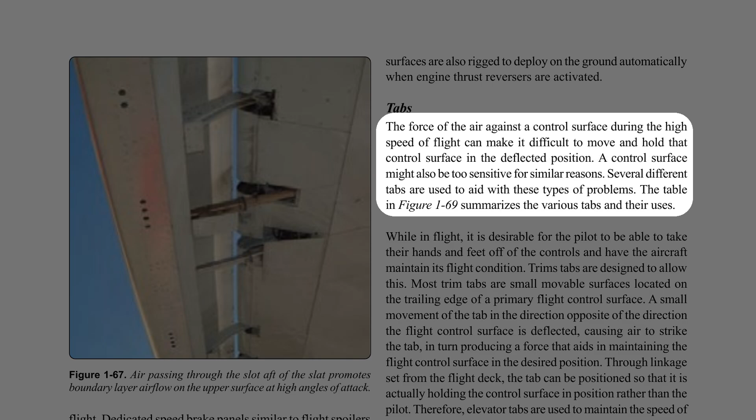While in flight, it is desirable for the pilot to be able to take their hands and feet off of the controls and have the aircraft maintain its flight condition. Trim tabs are designed to allow this.

Most trim tabs are small movable surfaces located on the trailing edge of a primary flight control surface. A small movement of the tab in the direction opposite of the direction the flight control surface is deflected causes air to strike the tab, in turn producing a force that aids in maintaining the flight control surface in the desired position. Through linkage set from the flight deck, the tab can be positioned so that it is actually holding the control surface in position rather than the pilot.

Therefore, elevator tabs are used to maintain the speed of the aircraft since they assist in maintaining the selected pitch. Rudder tabs can be set to hold yaw in check and maintain heading. Aileron tabs can help keep the wings level.

Occasionally, a simple light aircraft may have a stationary metal plate attached to the trailing edge of a primary flight control, usually the rudder. This is also a trim tab, as shown in Figure 1-70. It can be bent slightly on the ground to trim the aircraft in flight to a hands-off condition when flying straight and level. The correct amount of bend can be determined only by flying the aircraft after an adjustment.

Note that a small amount of bending is usually sufficient. The aerodynamic phenomenon of moving a trim tab in one direction to cause the control surface to experience a force moving in the opposite direction is exactly what occurs with the use of balance tabs.

Often it is difficult to move a primary control surface due to its surface area and the speed of air rushing over it. Deflecting a balance tab hinged at the trailing edge of the control surface in the opposite direction of the desired control surface movement causes a force to position the surface in the proper direction with reduced force. Balance tabs are usually linked directly to the control surface linkage so they move automatically when there is an input for control surface movement.

They can also double as trim tabs, if adjustable in the flight deck. The servo tab is similar to a balance tab in location and effect, but it is designed to operate the primary flight control surface, not just reduce the force needed to do so. It is usually used as a means to back up the primary control of the flight control surfaces.

On heavy aircraft, large control surfaces require too much force to be moved manually and are usually deflected out of the neutral position by hydraulic actuators. These power control units are signaled via a system of hydraulic valves connected to the yoke and rudder pedals. On fly-by-wire aircraft, the hydraulic actuators that move the flight control surfaces are signaled by electric input. In the case of hydraulic system failure, manual linkage to a servo tab can be used to deflect it.

A control surface may require excessive force to move only in the final stages of travel. When this is the case, a spring tab can be used. This is essentially a servo tab that does not activate until an effort is made to move the control surface beyond a certain point. When reached, a spring in line of the control linkage aids in moving the control surface through the remainder of its travel.

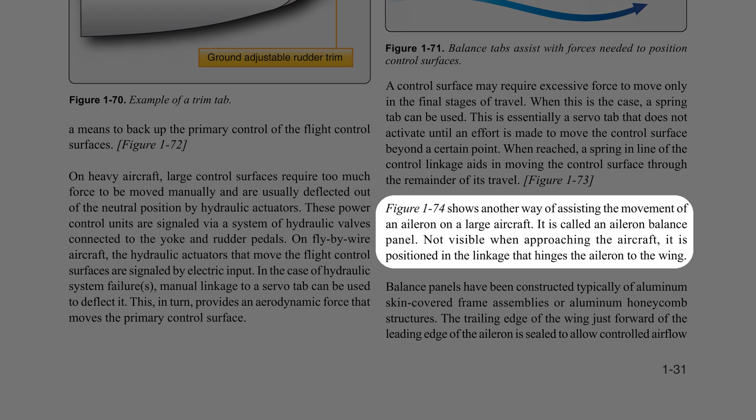Figure 1-74 shows another way of assisting the movement of an aileron on a large aircraft. It is called an aileron balance panel. Not visible when approaching the aircraft, it is positioned in the linkage that hinges the aileron to the wing. Balance panels have been constructed typically of aluminum skin-covered frame assemblies or aluminum honeycomb structures.

The trailing edge of the wing just forward of the leading edge of the aileron is sealed to allow controlled airflow in and out of the hinge area where the balance panel is located. When the aileron is moved from the neutral position, differential pressure builds up on one side of the balance panel. This differential pressure acts on the balance panel in a direction that assists the aileron movement.

For slight movements, deflecting the control tab at the trailing edge of the aileron is easy enough to not require significant assistance from the balance tab. Moving the control tab moves the ailerons as desired, but as greater deflection is requested, the force resisting control tab and aileron movement becomes greater and augmentation from the balance tab is needed. The seals and mounting geometry allow the differential pressure of airflow on the balance panel to increase as deflection of the ailerons is increased. This makes the resistance felt when moving the aileron controls relatively constant.

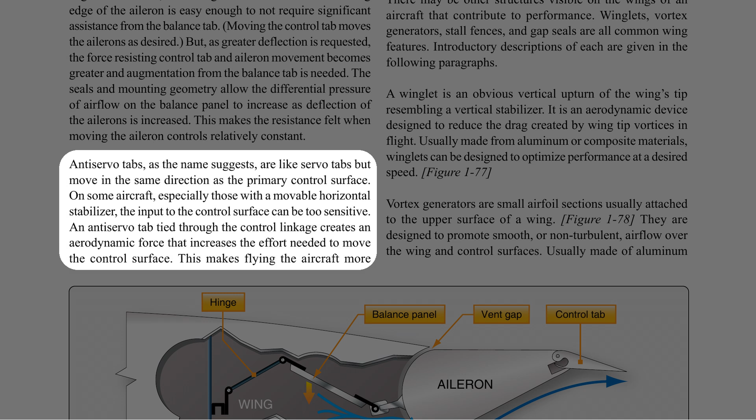Anti-servo tabs, as the name suggests, are like servo tabs but move in the same direction as the primary control surface. On some aircraft, especially those with a movable horizontal stabilizer, the input to the control surface can be too sensitive. An anti-servo tab tied through the control linkage creates an aerodynamic force that increases the effort needed to move the control surface. This makes flying the aircraft more stable for the pilot. Figure 1-76 shows an anti-servo tab in the near-neutral position. Deflected in the same direction as the desired stabilator movement, it increases the required control surface input.

There may be other structures visible on the wings of an aircraft that contribute to performance. Winglets, vortex generators, stall fences, and gap seals are all common wing features. A winglet is an obvious vertical upturn of the wing's tip resembling a vertical stabilizer. It is an aerodynamic device designed to reduce the drag created by wingtip vortices in flight. Usually made from aluminum or composite materials, winglets can be designed to optimize performance at a desired speed.

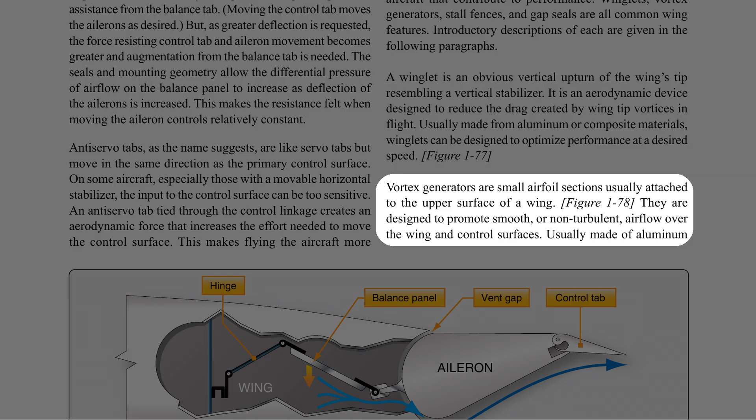Vortex generators are small airfoil sections usually attached to the upper surface of a wing. They are designed to promote smooth or non-turbulent airflow over the wing and control surfaces. Usually made of aluminum and installed in a spanwise line or lines, the vortices created by these devices swirl downward, assisting maintenance of the boundary layer of air flowing over the wing. They can also be found on the fuselage and empennage. Figure 179 shows the unique vortex generators on a Symphony SA-160 wing.

A chordwise barrier on the upper surface of the wing, called a stall fence, is used to halt the spanwise flow of air. During low-speed flight, this can maintain proper chordwise airflow, reducing the tendency for the wing to stall. Usually made of aluminum, the fence is a fixed structure most common on swept wings, which have a natural spanwise tending boundary airflow.

Often a gap can exist between the stationary trailing edge of a wing or stabilizer and the movable control surfaces. At high angles of attack, high-pressure air from the lower wing surface can be disrupted at this gap. The result can be turbulent airflow, which increases drag. There is also a tendency for some lower wing boundary air to enter the gap and disrupt the upper wing surface airflow, which in turn reduces lift and control surface responsiveness.

The use of gap seals is common to promote smooth airflow in these gap areas. Gap seals can be made of a wide variety of materials ranging from aluminum and impregnated fabric to foam and plastic. Figure 181 shows some gap seals installed on various aircraft.

Landing gear. The landing gear supports the aircraft during landing and while it is on the ground. Simple aircraft that fly at low speeds generally have fixed gear. This means the gear is stationary and does not retract for flight. Faster, more complex aircraft have retractable landing gear. After takeoff, the landing gear is retracted into the fuselage or wings and out of the airstream.

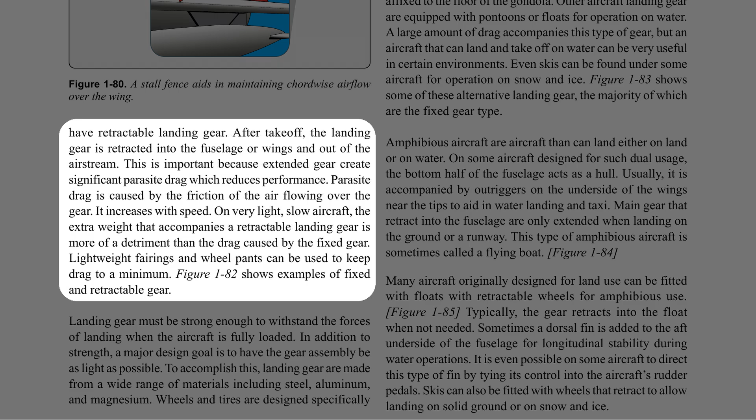Landing gear must be strong enough to withstand the forces of landing when the aircraft is fully loaded. In addition to strength, a major design goal is to have the gear assembly be as light as possible. To accomplish this, landing gear are made from a wide range of materials, including steel, aluminum, and magnesium.

Wheels and tires are designed specifically for aviation use and have unique operating characteristics. Main wheel assemblies usually have a braking system. To aid with the potentially high impact of landing, most landing gear have a means of either absorbing shock or accepting shock and distributing it so that the structure is not damaged.

Not all aircraft landing gear are configured with wheels. Helicopters, for example, have such high maneuverability and low landing speeds that a set of fixed skids is common and quite functional with lower maintenance. The same is true for free balloons, which fly slowly and land on wood skids affixed to the floor of the gondola.

Other aircraft landing gear are equipped with pontoons or floats for operation on water. A large amount of drag accompanies this type of gear, but an aircraft that can land and take off on water can be very useful in certain environments. Even skis can be found under some aircraft for operation on snow and ice. Figure 183 shows some of these alternative landing gear, the majority of which are the fixed gear type.

Amphibious aircraft are aircraft that can land either on land or on water. On some aircraft designed for such dual usage, the bottom half of the fuselage acts as a hull. Usually it is accompanied by outriggers on the underside of the wings near the tips to aid in water landing and taxi. Main gear that retract into the fuselage are only extended when landing on the ground or a runway. This type of amphibious aircraft is sometimes called a flying boat.

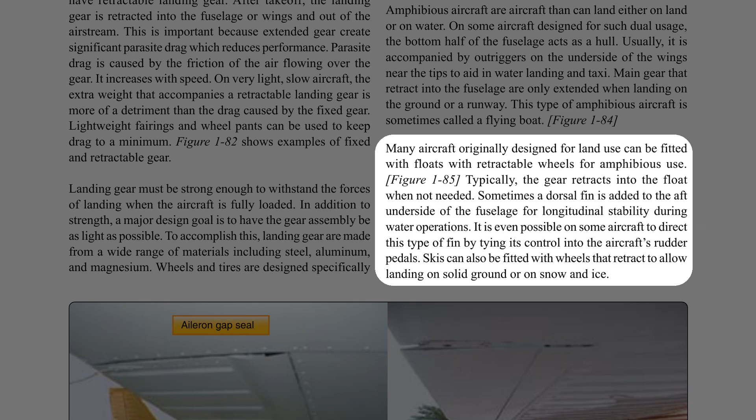Often this tail wheel is able to be steered by rigging cables attached to the rudder pedals. Other conventional gear have no tail wheel at all, using just a steel skid plate under the aft fuselage instead. The small tail wheel or skid plate allows the fuselage to incline, giving clearance for the long propellers that prevailed in aviation through WWI.

But the inclined fuselage blocks the straight-ahead vision of the pilot during ground operations. Until up to speed where the elevator becomes effective to lift the tail wheel off the ground, the pilot must lean his head out the side of the flight deck to see directly ahead of the aircraft.

Landing tailwheel aircraft can easily ground loop. A ground loop is when the tail of the aircraft swings around and comes forward of the nose of the aircraft. The reason this happens is due to the two main wheels being forward of the aircraft's center of gravity. The tail wheel is aft of the center of gravity.

If the aircraft swerves upon landing, the tail wheel can swing out to the side of the intended path of travel. If far enough to the side, the tail can pull the center of gravity out from its desired location slightly aft of but between the main gear. Once the center of gravity is no longer trailing the mains, the tail of the aircraft freely pivots around the main wheels, causing the ground loop.

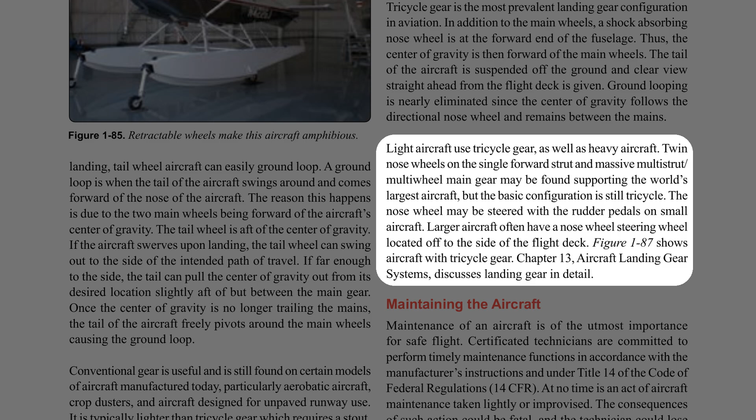Figure 187 shows aircraft with tricycle gear. Chapter 13, Aircraft Landing Gear Systems, discusses landing gear in detail.

Maintenance of an aircraft is of the utmost importance for safe flight. Certificated technicians are committed to perform timely maintenance functions in accordance with the manufacturer's instructions and under Title 14 of the Code of Federal Regulations, 14 CFR. At no time is an act of aircraft maintenance taken lightly or improvised. The consequences of such action could be fatal, and the technician could lose their certificate and face criminal charges.

Airframe, engine, and aircraft component manufacturers are responsible for documenting the maintenance procedures that guide managers and technicians on when and how to perform maintenance on their products. A small aircraft may only require a few manuals, including the Aircraft Maintenance Manual. This volume usually contains the most frequently used information required to maintain the aircraft properly. The Type Certificate Data Sheet, or TCDS, for an aircraft also contains critical information.

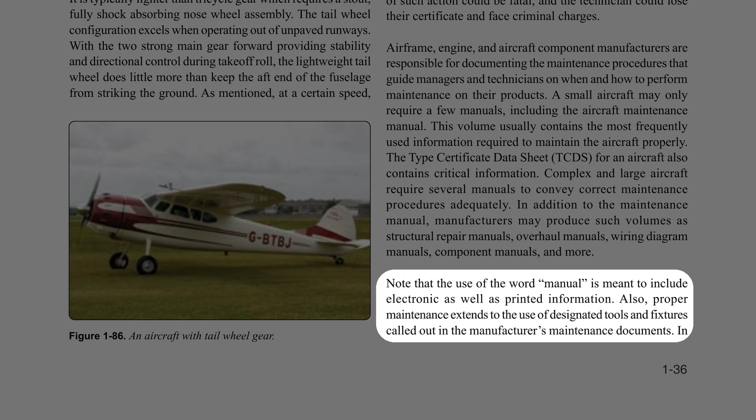Complex and large aircraft require several manuals to convey correct maintenance procedures adequately. In addition to the maintenance manual, manufacturers may produce such volumes as structural repair manuals, overhaul manuals, wiring diagram manuals, component manuals, and more. Note that the use of the word manual is meant to include electronic as well as printed information. Also, proper maintenance extends to the use of designated tools and fixtures called out in the manufacturer's maintenance documents. In the past, not using the proper tooling has caused damage to critical components, which subsequently failed and led to aircraft crashes and the loss of human life.

The technician is responsible for using the correct information, procedures, and tools needed to perform appropriate maintenance or repairs. Standard aircraft maintenance procedures do exist and can be used by the technician when performing maintenance or a repair. These are found in the FAA-approved advisory circulars: AC 43.13-2, Acceptable Methods, Techniques, and Practices, Aircraft Alterations, and AC 43.13-1, Acceptable Methods, Techniques, and Practices, Aircraft Inspection and Repair. If not addressed by the manufacturer's literature, the technician may use the procedures outlined in these manuals to complete the work in an acceptable manner.

These procedures are not specific to any aircraft or component and typically cover methods used during maintenance of all aircraft. Note that the manufacturer's instructions supersede the general procedures found in AC 43.13-2 and AC 43.13-1.

All maintenance-related actions on an aircraft or component are required to be documented by the performing technician in the aircraft or component logbook. Light aircraft may have only one logbook for all work performed. Some aircraft may have a separate engine logbook for any work performed on the engine. Other aircraft have separate propeller logbooks. Large aircraft require volumes of maintenance documentation comprised of thousands of procedures performed by hundreds of technicians. Electronic dispatch and record keeping of maintenance performed on large aircraft such as airliners is common. The importance of correct maintenance record keeping should not be overlooked.

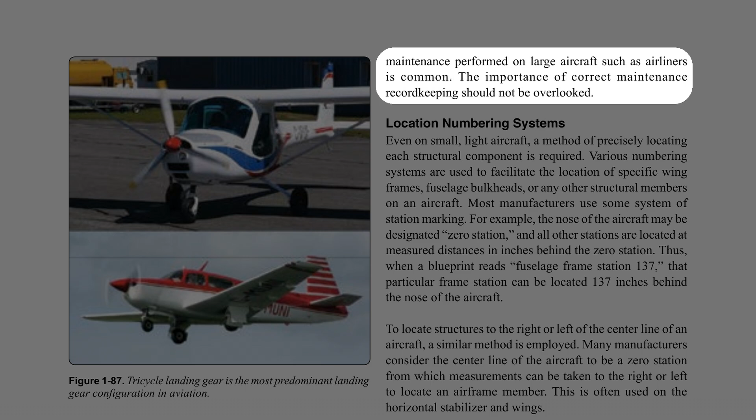Location numbering systems: even on small light aircraft, a method of precisely locating each structural component is required. Various numbering systems are used to facilitate the location of specific wing frames, fuselage bulkheads, or any other structural members on an aircraft. Most manufacturers use some system of station marking. For example, the nose of the aircraft may be designated 0 station, and all other stations are located at measured distances in inches behind the 0 station.

Thus, when a blueprint reads fuselage frame station 137, that particular frame station can be located 137 inches behind the nose of the aircraft. To locate structures to the right or left of the center line of an aircraft, a similar method is employed. Many manufacturers consider the center line of the aircraft to be a 0 station, from which measurements can be taken to the right or left to locate an airframe member. This is often used on the horizontal stabilizer and wings.

The applicable manufacturer's numbering system and abbreviated designations or symbols should always be reviewed before attempting to locate a structural member. They are not always the same. The following list includes location designations typical of those used by many manufacturers.

Fuselage stations, FUS, STA, or FS, are numbered in inches from a reference or 0 point known as the reference datum. The reference datum is an imaginary vertical plane at or near the nose of the aircraft from which all fore and aft distances are measured. The distance to a given point is measured in inches parallel to a center line extending through the aircraft from the nose through the center of the tail cone.

Some manufacturers may call the fuselage station a body station, abbreviated BS. Buttock line, or butt line, BL, is a vertical reference plane down the center of the aircraft from which measurements left or right can be made. Waterline, WL, is the measurement of height in inches perpendicular from a horizontal plane usually located at the ground, cabin floor, or some other easily referenced location.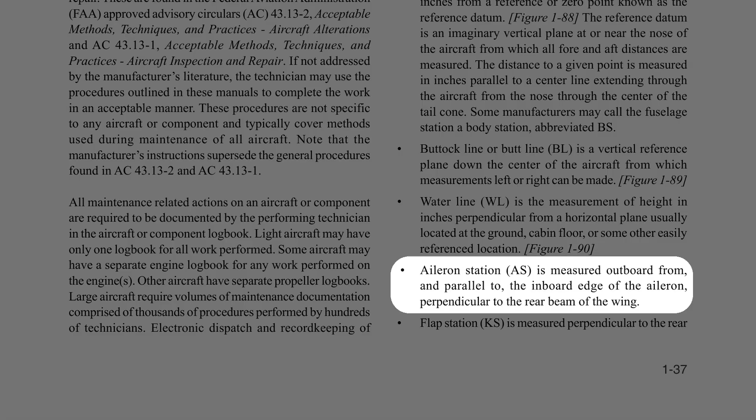Aileron station, AS, is measured outboard from and parallel to the inboard edge of the aileron, perpendicular to the rear beam of the wing. Flap station, KS, is measured perpendicular to the rear beam of the wing and parallel to and outboard from the inboard edge of the flap.

Nacelle station, NC or NAC, is measured either forward of or behind the front spar of the wing and perpendicular to a designated waterline. In addition to the location stations listed above, other measurements are used, especially on large aircraft. Thus, there may be horizontal stabilizer stations, HSS, vertical stabilizer stations, VSS, or power plant stations, PPS. In every case, the manufacturer's terminology and station location system should be consulted before locating a point on a particular aircraft.

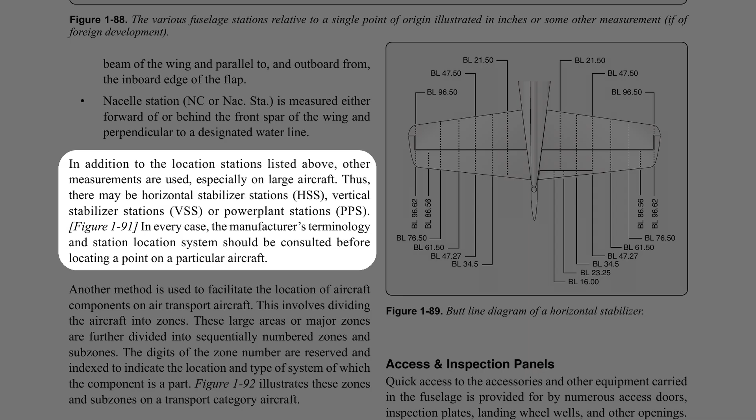Another method is used to facilitate the location of aircraft components on air transport aircraft. This involves dividing the aircraft into zones. These large areas or major zones are further divided into sequentially numbered zones and subzones. The digits of the zone number are reserved and indexed to indicate the location and type of system of which the component is a part. Figure 1-92 illustrates these zones and subzones on a transport category aircraft.

Access and inspection panels: quick access to the accessories and other equipment carried in the fuselage is provided for by numerous access doors, inspection plates, landing wheel wells, and other openings. Servicing diagrams showing the arrangement of equipment and location of access doors are supplied by the manufacturer in the aircraft maintenance manual.

Knowing where a particular structure or component is located on an aircraft needs to be combined with gaining access to that area to perform the required inspections or maintenance. To facilitate this, access and inspection panels are located on most surfaces of the aircraft. Small panels that are hinged or removable allow inspection and servicing, while large panels and doors allow components to be removed and installed, as well as human entry for maintenance purposes.

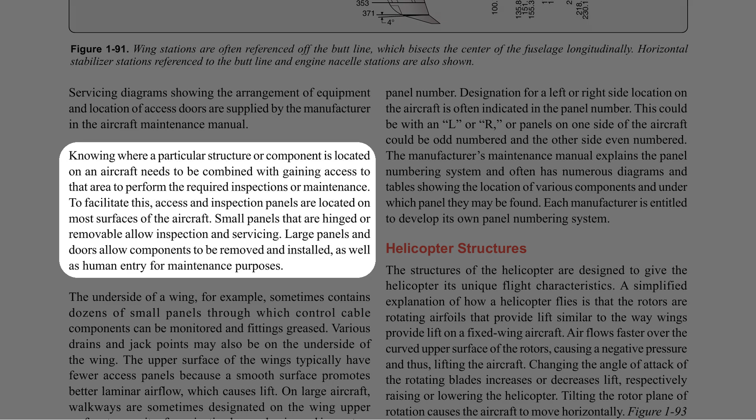The underside of a wing, for example, sometimes contains dozens of small panels through which control cable components can be monitored and fittings greased. Various drains and jack points may also be on the underside of the wing. The upper surface of the wings typically have fewer access panels because a smooth surface promotes better laminar airflow, which causes lift. On large aircraft, walkways are sometimes designated on the wing upper surface to permit safe navigation by mechanics.

Wheel wells and special component bays are places where numerous components and accessories are grouped together for easy maintenance access.

Panels and doors on aircraft are numbered for positive identification. On large aircraft, panels are usually numbered sequentially, containing zone and subzone information in the panel number. Designation for a left or right side location on the aircraft is often indicated in the panel number. This could be with an L or R, or panels on one side of the aircraft could be odd numbered and the other side even numbered.

Each manufacturer's maintenance manual explains the panel numbering system and often has numerous diagrams and tables showing the location of various components and under which panel they may be found. Each manufacturer is entitled to develop its own panel numbering system.

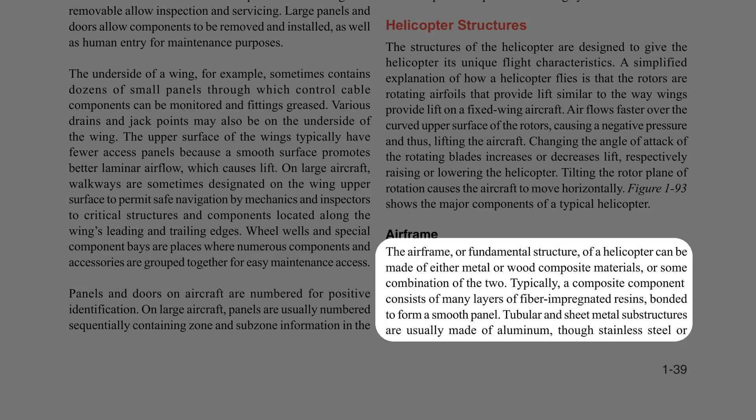Airframe. The airframe, or fundamental structure, of a helicopter can be made of either metal or wood composite materials, or some combination of the two. Typically, a composite component consists of many layers of fiber-impregnated resins, bonded to form a smooth panel. Tubular and sheet metal substructures are usually made of aluminum, though stainless steel or titanium are sometimes used in areas subject to higher stress or heat. Airframe design encompasses engineering, aerodynamics, materials technology, and manufacturing methods to achieve favorable balances of performance, reliability, and cost.

Fuselage. As with fixed-wing aircraft, helicopter fuselages and tailbooms are often truss-type or semi-monocoque structures of stress skin design. Steel and aluminum tubing, formed aluminum, and aluminum skin are commonly used. Modern helicopter fuselage design includes an increasing utilization of advanced composites as well. Firewalls and engine decks are usually stainless steel.

Helicopter fuselages vary widely, from those with a truss frame, two seats, no doors, and a monocoque shell flight compartment, to those with fully enclosed airplane-style cabins as found on larger twin-engine helicopters. The multi-directional nature of helicopter flight makes wide-range visibility from the flight deck essential. Large, formed polycarbonate, glass, or plexiglass windscreens are common.

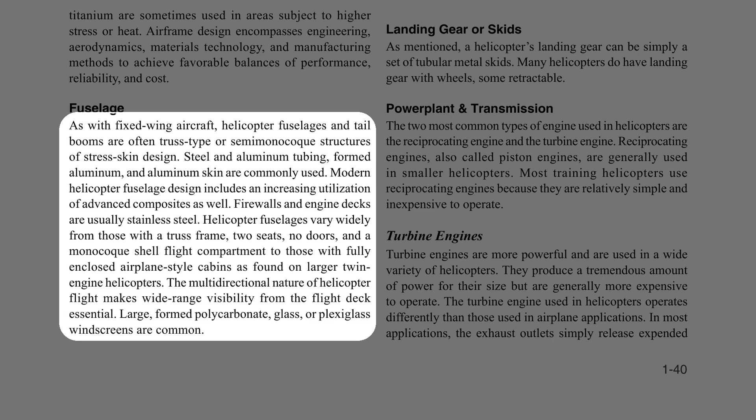Landing gear or skids. As mentioned, a helicopter's landing gear can be simply a set of tubular metal skids. Many helicopters do have landing gear with wheels, some retractable, power plant, and transmission.

The two most common types of engine used in helicopters are the reciprocating engine and the turbine engine. Reciprocating engines, also called piston engines, are generally used in smaller helicopters. Most training helicopters use reciprocating engines because they are relatively simple and inexpensive to operate.

Turbine engines are more powerful and are used in a wide variety of helicopters. They produce a tremendous amount of power for their size, but are generally more expensive to operate. The turbine engine used in helicopters operates differently than those used in airplane applications. In most applications, the exhaust outlets simply release expended gases and do not contribute to the forward motion of the helicopter.

Because the airflow is not a straight-line pass-through as in jet engines and is not used for propulsion, the cooling effect of the air is limited. Approximately 75% of the incoming airflow is used to cool the engine.

The gas turbine engine mounted on most helicopters is made up of a compressor, combustion chamber, turbine, and accessory gearbox. The compressor draws filtered air into the plenum chamber and compresses it.

Common type filters are centrifugal swirl tubes, where debris is ejected outward and blown overboard prior to entering the compressor, or engine barrier filters (EBF), a paper element type filter encased in a frame with a screen/grill over the inlet and usually coated with oil. This design significantly reduces the ingestion of foreign object debris.

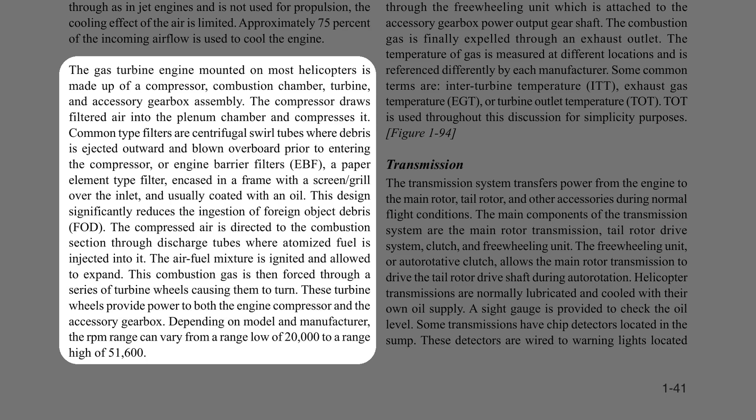Depending on model and manufacturer, the RPM range can vary from a low of 20,000 to a high of 51,600. Power is provided to the main rotor and tail rotor systems through the freewheeling unit, which is attached to the accessory gearbox power output gearshaft.

The combustion gas is finally expelled through an exhaust outlet. The temperature of the gas is measured at different locations and is referenced differently by each manufacturer. Some common terms are interturbine temperature (ITT), exhaust gas temperature (EGT), or turbine outlet temperature (TOT). TOT is used throughout this discussion for simplicity.

Transmission. The transmission system transfers power from the engine to the main rotor, tail rotor, and other accessories during normal flight conditions. The main components of the transmission system are the main rotor transmission, tail rotor drive system, clutch, and freewheeling unit. The freewheeling unit, or autorotative clutch, allows the main rotor transmission to drive the tail rotor drive shaft during autorotation. Helicopter transmissions are normally lubricated and cooled with their own oil supply.

A sight gauge is provided to check the oil level. Some transmissions have chip detectors located in the sump. These detectors are wired to warning lights located on the pilot's instrument panel that illuminate in the event of an internal problem. Some chip detectors on modern helicopters have a burn-off capability and attempt to correct the situation without pilot action. If the problem cannot be corrected on its own, the pilot must refer to the emergency procedures for that particular helicopter.

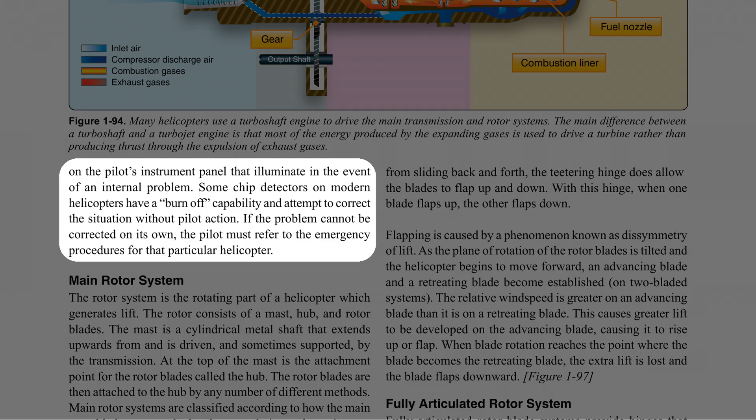Main rotor system. The rotor system is the rotating part of a helicopter which generates lift. The rotor consists of a mast, hub, and rotor blades. The mast is a cylindrical metal shaft that extends upwards from, and is driven and sometimes supported by, the transmission. At the top of the mast is the attachment point for the rotor blades, called the hub.

The rotor blades are then attached to the hub by any number of different methods. Main rotor systems are classified according to how the main rotor blades are attached and move relative to the main rotor hub. There are three basic classifications: rigid, semi-rigid, or fully articulated.

Rigid rotor system. The simplest is the rigid rotor system. In this system, the rotor blades are rigidly attached to the main rotor hub and are not free to slide back and forth (drag) or move up and down (flap). The forces tending to make the rotor blades do so are absorbed by the flexible properties of the blade. The pitch of the blades, however, can be adjusted by rotation about the span-wise axis via the feathering hinges.

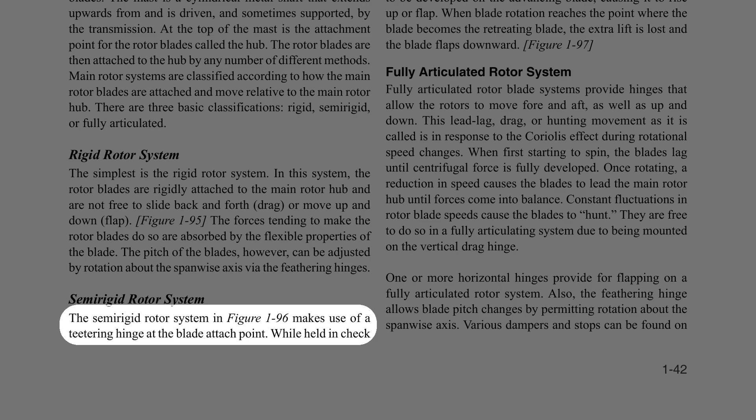Semi-rigid rotor system. The semi-rigid rotor system makes use of a teetering hinge at the blade attach point. While held in check from sliding back and forth, the teetering hinge does allow the blades to flap up and down. With this hinge, when one blade flaps up, the other flaps down.

Flapping is caused by a phenomenon known as dissymmetry of lift. As the plane of rotation of the rotor blades is tilted and a helicopter begins to move forward, an advancing blade and a retreating blade become established on two-bladed systems. The relative wind speed is greater on an advancing blade than it is on a retreating blade. This causes greater lift to be developed on the advancing blade, causing it to rise up, or flap. When blade rotation reaches the point where the blade becomes the retreating blade, the extra lift is lost and the blade flaps downward.

Fully articulated rotor system. Fully articulated rotor blade systems provide hinges that allow the rotors to move fore and aft, as well as up and down. This lead-lag, drag, or hunting movement, as it is called, is in response to the Coriolis effect during rotational speed changes.

When first starting to spin, the blades lag until centrifugal force is fully developed. Once rotating, a reduction in speed causes the blades to lead the main rotor hub until forces come into balance. Constant fluctuations in rotor blade speeds cause the blades to hunt. They are free to do so in a fully articulating system due to being mounted on the vertical drag hinge.

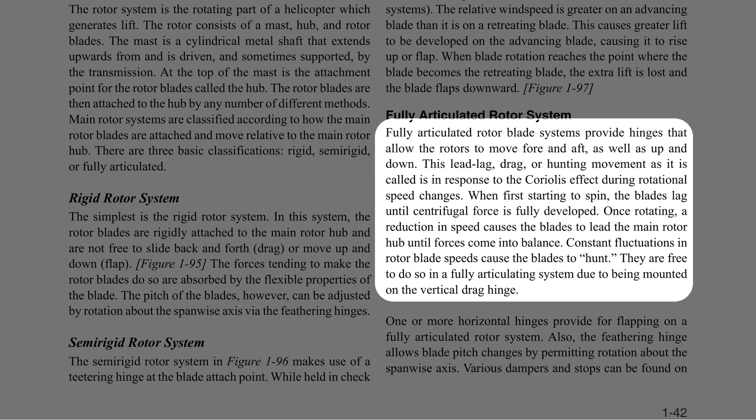One or more horizontal hinges provide for flapping on a fully articulated rotor system. Also, the feathering hinge allows blade pitch changes by permitting rotation about the spanwise axis. Various dampers and stops can be found on different designs to reduce shock and limit travel in certain directions. Figure 1.98 shows a fully articulated main rotor system with the features discussed.

Numerous designs and variations on the three types of main rotor systems exist. Engineers continually search for ways to reduce vibration and noise caused by the rotating parts of the helicopter. Toward that end, the use of elastomeric bearings in main rotor systems is increasing. These polymer bearings have the ability to deform and return to their original shape. As such, they can absorb vibration that would normally be transferred by steel bearings. They also do not require regular lubrication, which reduces maintenance.

Some modern helicopter main rotors have been designed with flexures. These are hubs and hub components made out of advanced composite materials. They are designed to take up the forces of blade hunting and dissymmetry of lift by flexing. As such, many hinges and bearings can be eliminated from the traditional main rotor system. The result is a simpler rotor mast with lower maintenance due to fewer moving parts. Often, designs using flexures incorporate elastomeric bearings.

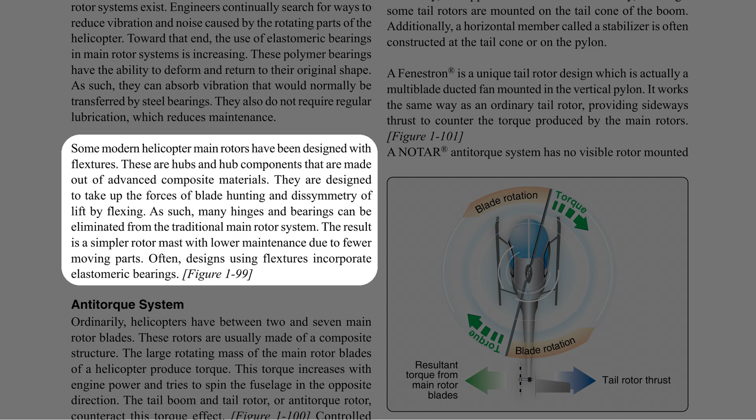Antitorque system: ordinarily, helicopters have between 2 and 7 main rotor blades. These rotors are usually made of a composite structure. The large rotating mass of the main rotor blades of a helicopter produce torque. This torque increases with engine power and tries to spin the fuselage in the opposite direction. The tail boom and tail rotor, or anti-torque rotor, counteract this torque effect.

Controlled with foot pedals, the counter torque of the tail rotor must be modulated as engine power levels are changed. This is done by changing the pitch of the tail rotor blades. This, in turn, changes the amount of counter torque, and the aircraft can be rotated about its vertical axis, allowing the pilot to control the direction the helicopter is facing.

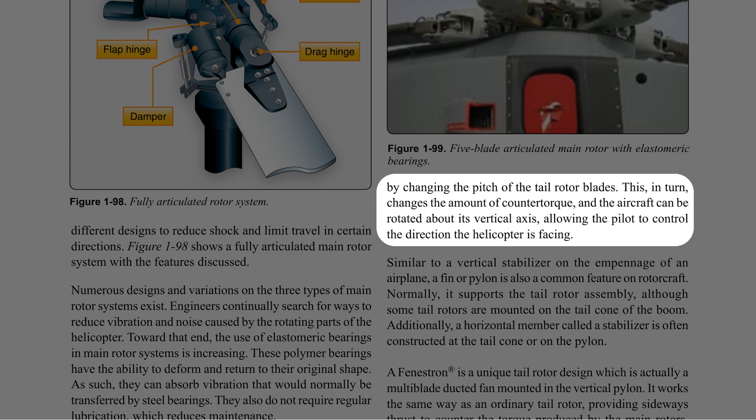Similar to a vertical stabilizer on the empennage of an airplane, a fin or pylon is also a common feature on rotorcraft. Normally it supports the tail rotor assembly, although some tail rotors are mounted on the tail cone of the boom. Additionally, a horizontal member called a stabilizer is often constructed at the tail cone or on the pylon.

A Fenestron is a unique tail rotor design, which is actually a multi-blade ducted fan mounted in the vertical pylon. It works the same way as an ordinary tail rotor, providing sideways thrust to counter the torque produced by the main rotors. A NOTAR anti-torque system has no visible rotor mounted on the tail boom. Instead, an engine-driven adjustable fan is located inside the tail boom.

NOTAR is an acronym that stands for No Tail Rotor. As the speed of the main rotor changes, the speed of the NOTAR fan changes. Air is vented out of two long slots on the right side of the tail boom, entraining main rotor wash to hug the right side of the tail boom, in turn causing laminar flow and a low-pressure Coanda effect. This low pressure causes a force counter to the torque produced by the main rotor.

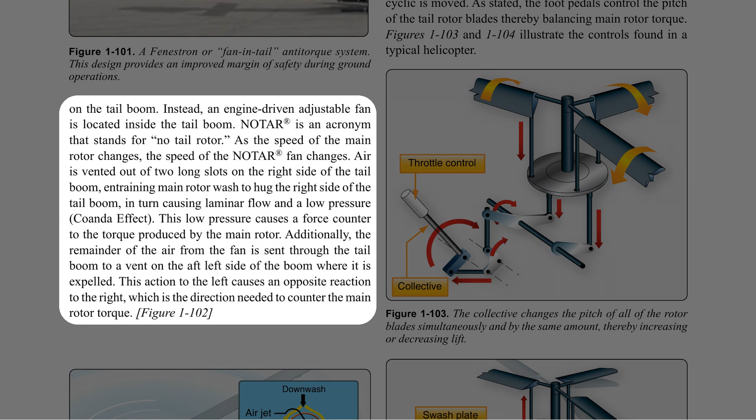Additionally, the remainder of the air from the fan is sent through the tail boom to a vent on the aft left side of the boom, where it is expelled. This action to the left causes an opposite reaction to the right, which is the direction needed to counter the main rotor torque. Controls: the controls of a helicopter differ slightly from those found in an aircraft.

The collective, operated by the pilot with the left hand, is pulled up or pushed down to increase or decrease the angle of attack on all of the rotor blades simultaneously. This increases or decreases lift and moves the aircraft up or down. The engine throttle control is located on the hand grip at the end of the collective.

The cyclic is the control stick located between the pilot's legs. It can be moved in any direction to tilt the plane of rotation of the rotor blades. This causes the helicopter to move in the direction that the cyclic is moved. As stated, the foot pedals control the pitch of the tail rotor blades, thereby balancing main rotor torque. Figures 1-103 and 1-104 illustrate the controls found in a typical helicopter.